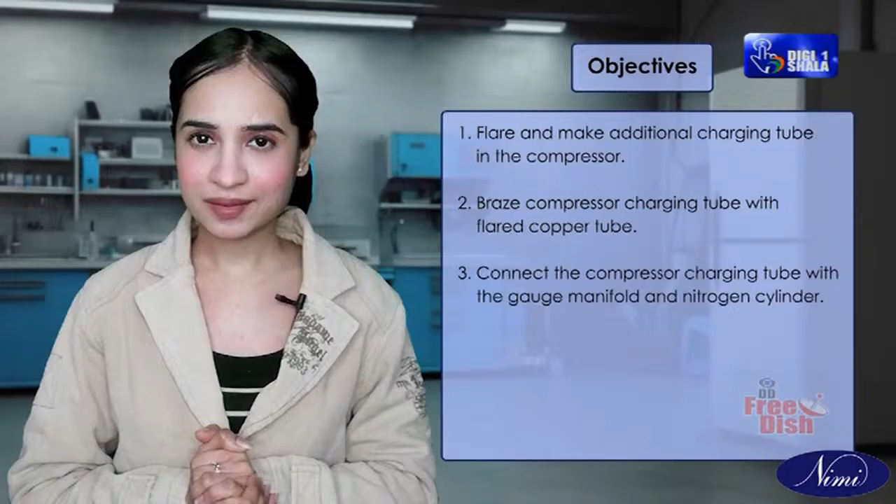Braze compressor charging tube with flared copper tube. Connect the compressor charging tube with the gauge manifold and nitrogen cylinder. Charge dry nitrogen gas into the system. Test the leak with a soap solution. Braze the leak spots. Connect the system with the vacuum pump. Dehydrate the system. Evacuate the system on both high and low sides. Gas charging into the system. Pinch the system.

Let us collect the material and equipment required to do this practical.

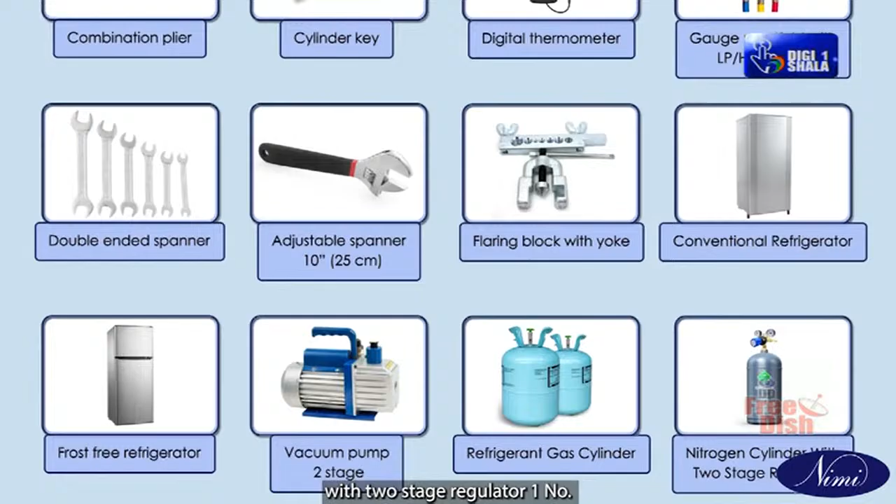Number 1, combination plier, 1 number. Number 2, cylinder key, 1 number. Number 3, digital thermometer, 1 number. Number 4, gauge manifold with LP or HP gauges, 1 set. Double-ended spanner, 1 set. Adjustable spanner, 10 inches, 25 cm, 1 number. Flaring block with yoke, 1 set. Conventional refrigerator, 1 number. Frost free refrigerator, 1 number. Vacuum pump, 2-stage, 1 number. Refrigerant gas cylinder, 1 number. Nitrogen cylinder with 2-stage regulator, 1 number. Soap solution as required.

Procedure, Task 1: Flare and make additional charging tube in compressor conventional refrigerator. Step 1: Make sure that there is no gas in the system. Through the charging tube of compressor, it should be open.

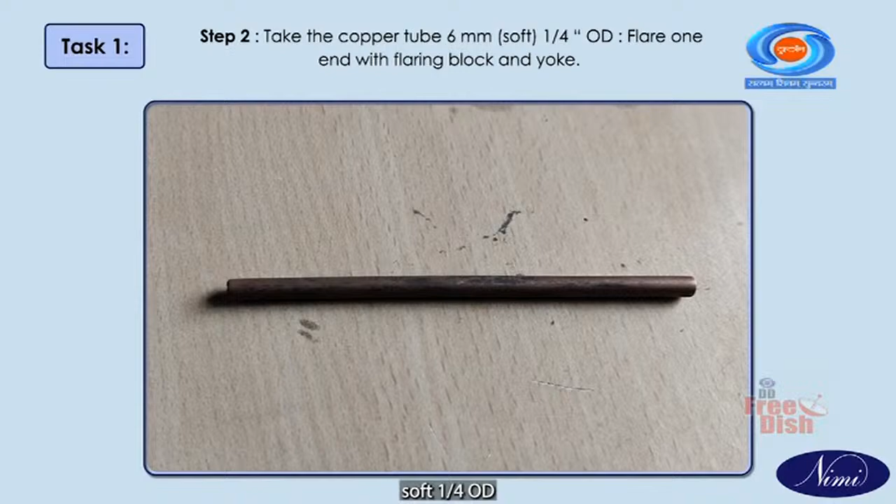Step 2: Take the copper tube 6 mm soft, 1/4 OD. Flare one end with flaring block and yoke. Step 3: Insert the flare nut 6 mm through the copper tube 6 mm at the non-flared end. Step 4: Insert 15 mm of the non-flared end of copper tube 6 mm into the compressor process tube.

Note: this practical exercise is to be done after leak testing of the unit or appliance. Ensure that the unit or appliance is already leak tested.

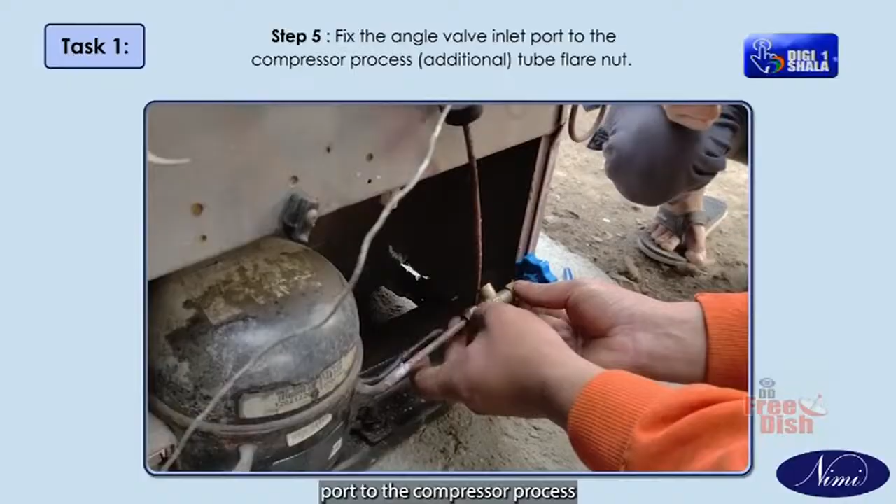Step 5: Fix the angle valve inlet port to the compressor process additional tube flare nut. Step 6: Tighten the joint angle valve flare nut by using a suitable double-ended spanner and adjustable spanner. Step 7: Make sure that the angle valve is closed.

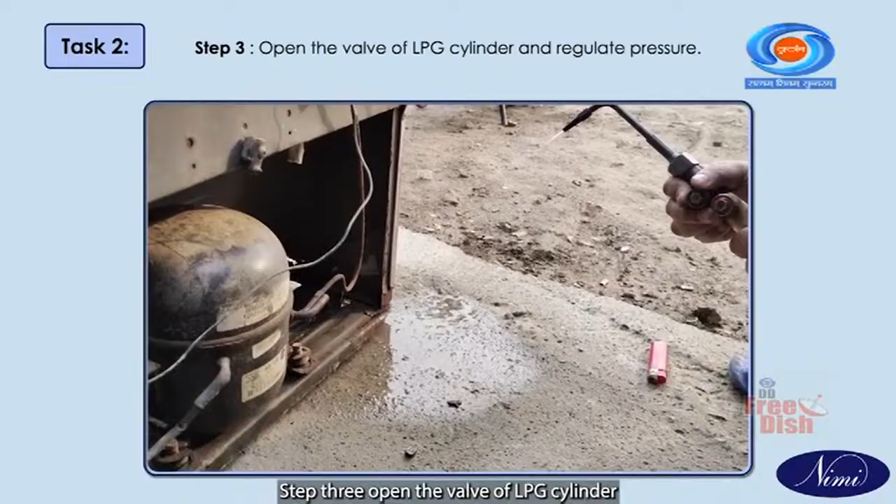Procedure, Task 2: Braze compressor charging tube with additional flared copper tube. Step 1: Take the gas welding brazing set. Step 2: Open the valve of the oxygen cylinder and regulate pressure. Step 3: Open the valve of LPG cylinder and regulate pressure. Step 4: Light up the brazing torch and set the flame to neutral type.

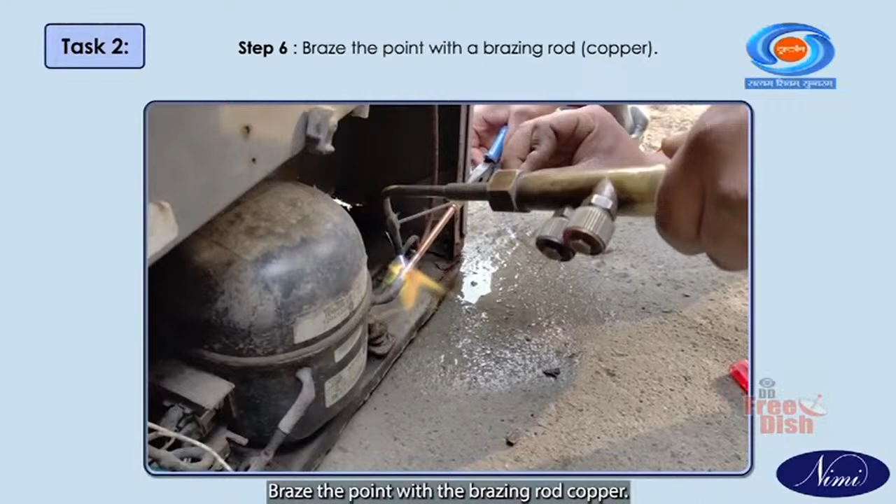Step 5: Take the flame to the point of the compressor charging tube with an additional copper tube 6 mm. Step 6: Braze the point with a brazing rod, copper. Step 7: Allow the point to cool down.

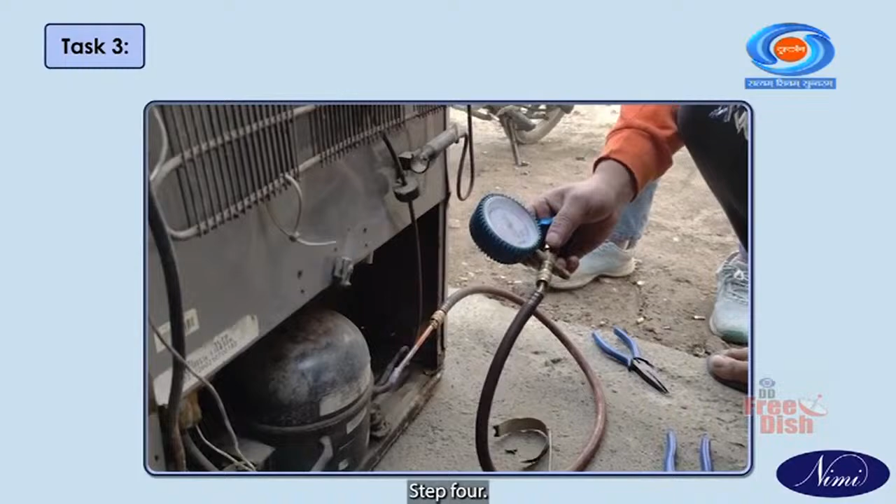Task 3: Connect compressor charging tube with gauge manifold and dry nitrogen gas cylinder. Step 1: Connect flare nut of additional charging tube with flare union 6 mm. Step 2: Connect the other end of flare union with charging hose. Step 3: Connect the other end of charging hose with the HP, high pressure, port of gauge manifold. Step 4: Connect the intermediate port of gauge manifold with another charging hose. Step 5: Connect the other end of charging hose with outlet port of nitrogen cylinder.

Task 4: Charge dry nitrogen gas into the system. Step 1: Make sure that all thread or screw points are in tight fit position. Step 2: If not, make the joints tight by using combination plier to tighten charging hose, and double-ended spanner and adjustable spanner to tighten flare nuts and flare unions.

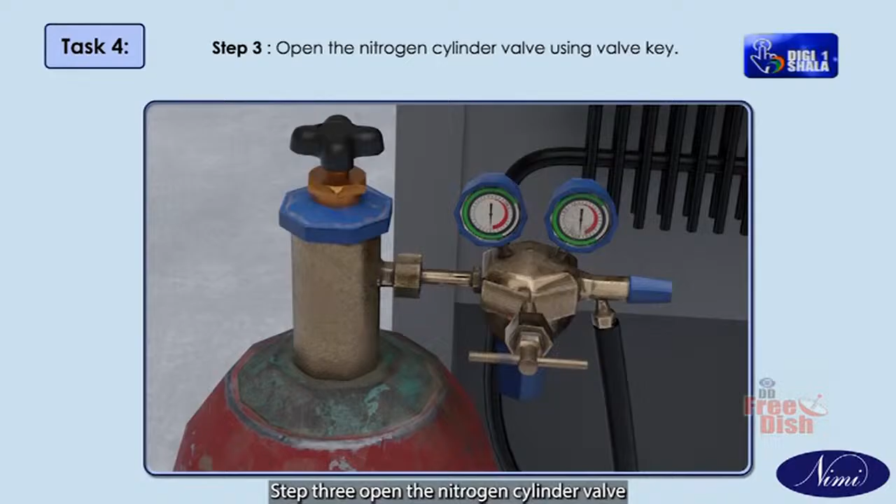Step 3: Open the nitrogen cylinder valve using valve key. Step 4: Regulate the pressure to 50 psi in the pressure regulator. Step 5: Open the knob of the high pressure port of gauge manifold by turning it gently in anti-clockwise direction. Step 6: Observe the nitrogen gas flowing into the system by noticing the reading in the HP gauge of the manifold.

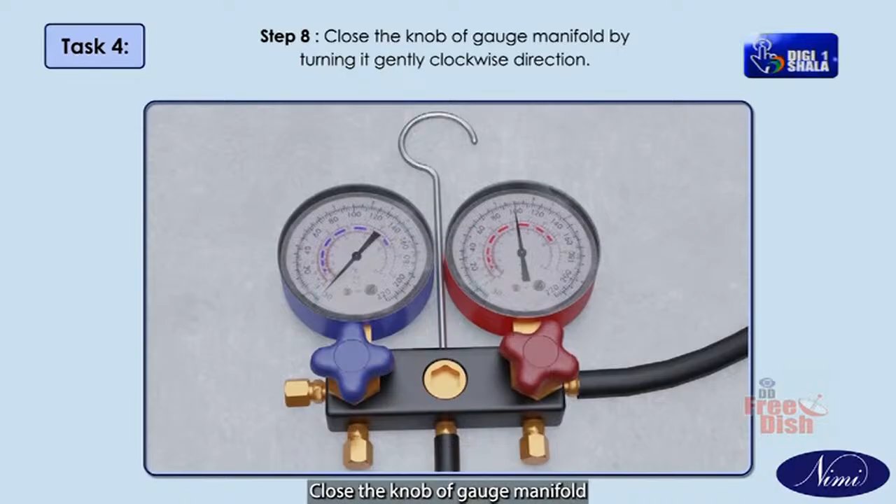Step 7: Allow the nitrogen flow for 15 to 20 seconds. Step 8: Close the knob of gauge manifold by turning it gently in the clockwise direction. Step 9: Observe the reading in the pressure gauge HP manifold.

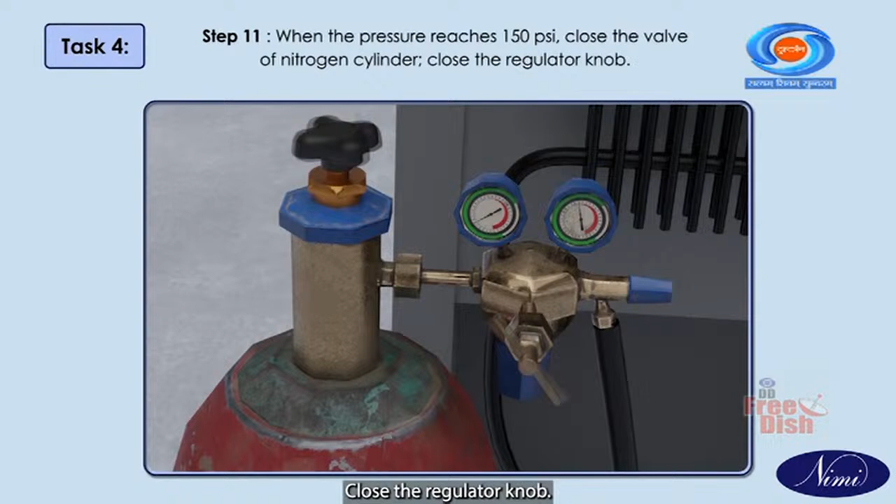Step 10: If the pressure has not reached 150 psig, again allow nitrogen flow into the system by reopening the knob of the manifold. Step 11: When the pressure reaches 150 psi, close the valve of the nitrogen cylinder. Close the regulator knob. Step 12: Close the knob of gauge manifold.

Step 13: Take the dry bulb thermometer and find the temperature of ambient air. Step 14: Note down the time. Step 15: Tabulate the readings in the tabular column which is given at the end of this exercise.

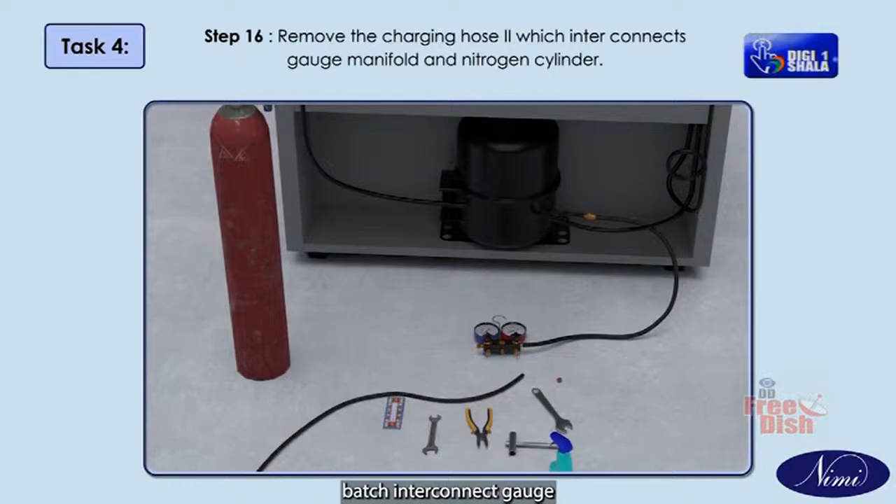Step 16: Remove the charging hose second, which interconnects gauge manifold and nitrogen cylinder. Step 17: Close the intermediate port of manifold by dummy nut brass 6 mm.

Task 5: Test leak with soap solution. Step 1: Take a plastic or metal mug filled with pure water, 500 ml. Step 2: Add 25 ml of soap solution concentrate into the water. Step 3: Stir, mix well and make lather using a paintbrush.

Step 4. If the lather is not sufficient, add some more soap solution into the mixture. Step 5. Soak the sponge into the soap solution mixture. Step 6. Take a small quantity of soap solution mixture with the brush and apply the solution on the points.

Screwed joints, charging hose adapters, flare nuts, etc. Brazed joints are the places where copper tubes are joined together.

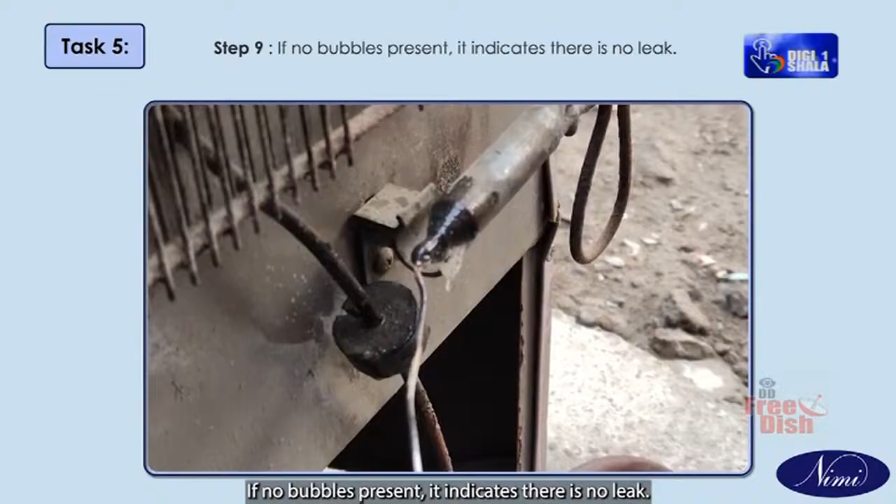Step 7. Take the sponge with solution and lather, and place it under the joints. Step 8. Carefully watch for any nitrogen bubbles coming from the system through the soap solution mixture. Step 9. If no bubbles are present, it indicates there is no leak. Step 10. If any bubbles are present at the joint, add more soap solution on the joint and find exactly where it is coming from.

Step 11. If the leak is at screwed or threaded joints, flare nuts, or charging hose adapters, make it a tight fit and arrest the leak using a double-ended spanner, adjustable spanner, or cutting plier. Step 12. If the leak is at brazed joints or copper tube, confirm the leak and note down the repairs to carry out.

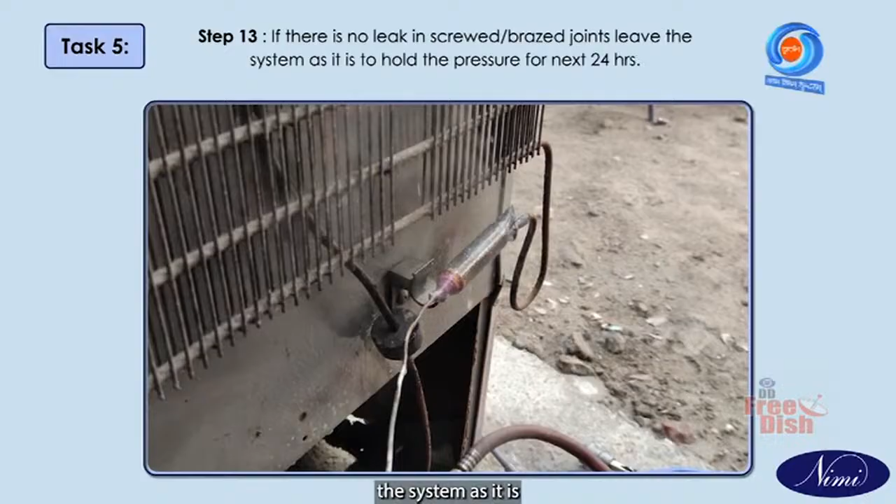Step 13. If there is no leak in the screwed or brazed joints, leave the system as it is to hold the pressure for the next 24 hours. Step 14. After 24 hours, note down the reading: pressure, ambient temperature, and time.

Step 15. Compare the reading of pressure with the previous day's reading. Step 16. If there is no difference between the two readings, or if there is a 5 to 10 psi difference between the two readings, the system has no leak.

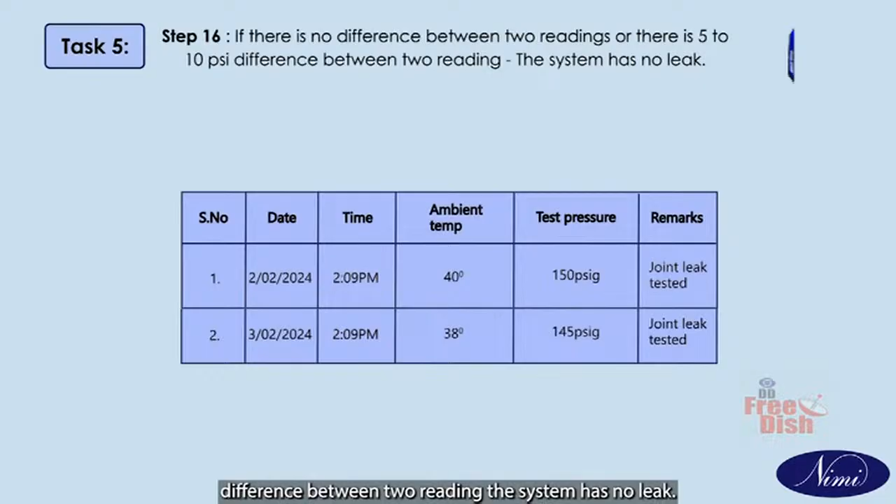Task 6. Braze the leak spots. Step 1. If there are any leaks in brazed joints, mark the spots. Step 2. Let out the nitrogen pressure from the system. Step 3. Clean the leak spots with emery paper.

Step 4. Light the brazing torch and use goggles. Step 5. Heat the top and bottom joints of the leakage pipes. When it gets red hot, apply flux and apply the copper rod.

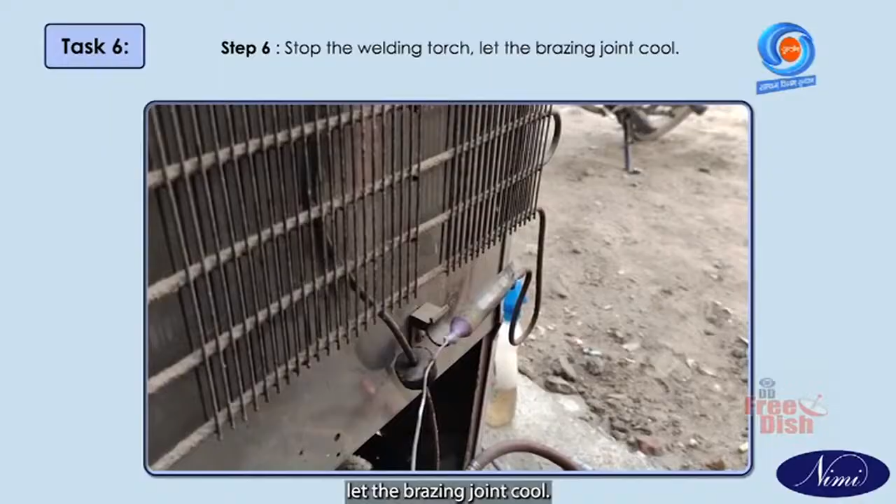Step 6. Stop the welding torch and let the brazing joint cool. Step 7. Pressurize the system with dry nitrogen. Step 8. Check for leaks with soap water on all brazed joints. Step 9. If there is no leak, vent the nitrogen pressure.

Task 7. Connect the system with the vacuum pump. Step 1. Connect one end of charging hose 1 to the outlet of the angle valve, and tighten the joint with a cutting plier. Step 2. Connect the other end of the charging hose to the LP (low pressure) port of the gauge manifold.

Step 3. Connect one end of charging hose 2 to the intermediate port of the gauge manifold. Step 4. Connect the other end of charging hose 2 to the inlet port of the vacuum pump. Step 5. Close the HP (high pressure) port of the gauge manifold with a brass flare dummy nut, 6 mm.

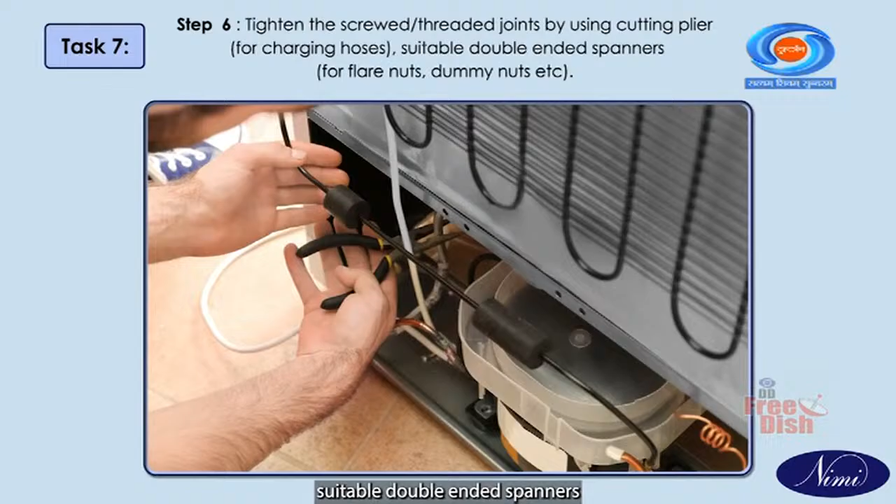Step 6. Tighten the screwed or threaded joints using a cutting plier for charging hoses and suitable double-ended spanners for flare nuts, dummy nuts, etc. Step 7. Make sure that the HP and LP knobs of the gauge manifold are closed.

Recap. In this video, so far we have discussed: number 1, flare and make additional charging tubes in the compressor; number 2, braze compressor charging tubes; number 3, connect the compressor charging tube with the gauge manifold and nitrogen cylinder; number 4, charge nitrogen gas into the system.

Number 5, test the leak with a soap solution. Number 6, braze the leak spots. Number 7, connect the system with a vacuum pump.

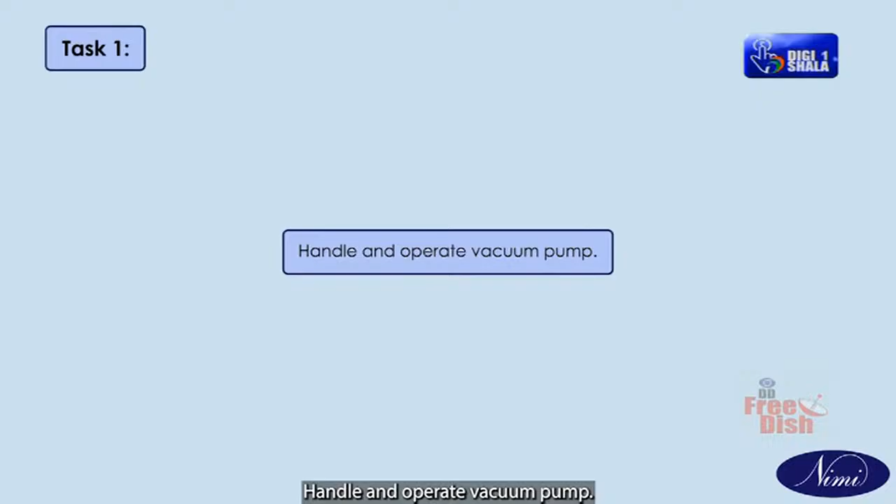Task 1. Handle and operate the vacuum pump. Step 1. Ensure that electrical power supply is available to the vacuum pump by using a line tester. Step 2. Connect the electrical power line of the vacuum pump to the power source, test board, or switchboard. Step 3. Switch on the vacuum pump.

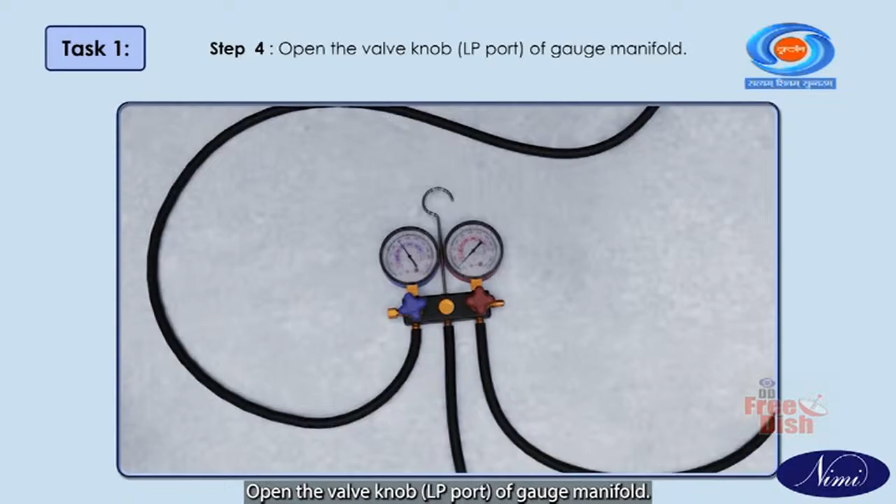Step 4. Open the valve knob, LP port of the gauge manifold. Step 5. Open the angle valve by turning its stem in an anti-clockwise direction with a ratchet key or wrench.

Step 6. Observe the pressure reading available on the LP gauge of manifold. The pressure keeps reducing. Step 7. Leave the system as it is for 2 hours without any interruption.

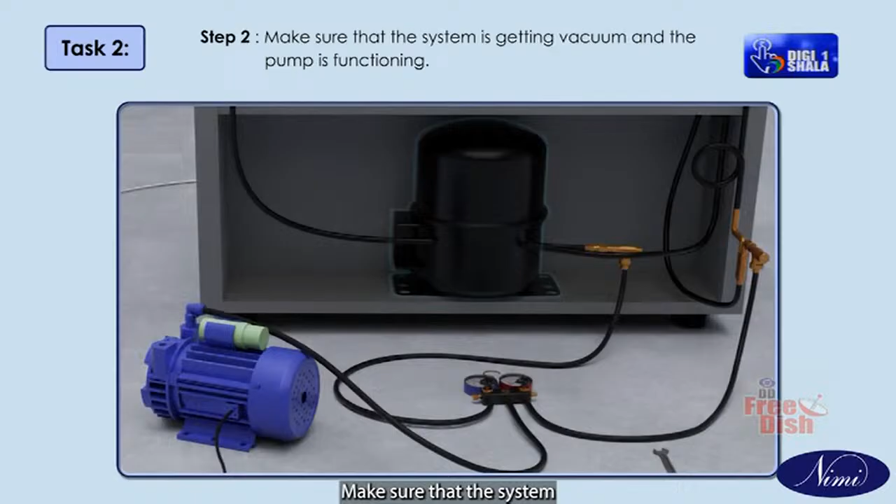Task 2. Dehydrate the system. Step 1. Take the heating kit infrared lamp and switch it on. Step 2. Make sure that the system is getting vacuum and the pump is functioning.

Step 3. Heat all over areas of the system with infrared lamp. Step 4. Apply heat uniformly to all areas: refrigerant tubes, condenser coil, evaporator coil if it is exposed, liquid line dryer or filter.

Step 5. Keep and maintain the distance between the heating kit and surface of the system at 15 cm always. Step 6. Continue the process for 15 to 30 minutes.

Task 10. Evacuate the system. Step 1. Notice and observe the pressure reading on the LP gauge of the manifold. It should be 100 microns or below, equivalent to 30 inches of Hg.

Step 2. Close the angle valve by turning its stem clockwise with a ratchet key or wrench after 3 hours from the time the vacuum pump started.

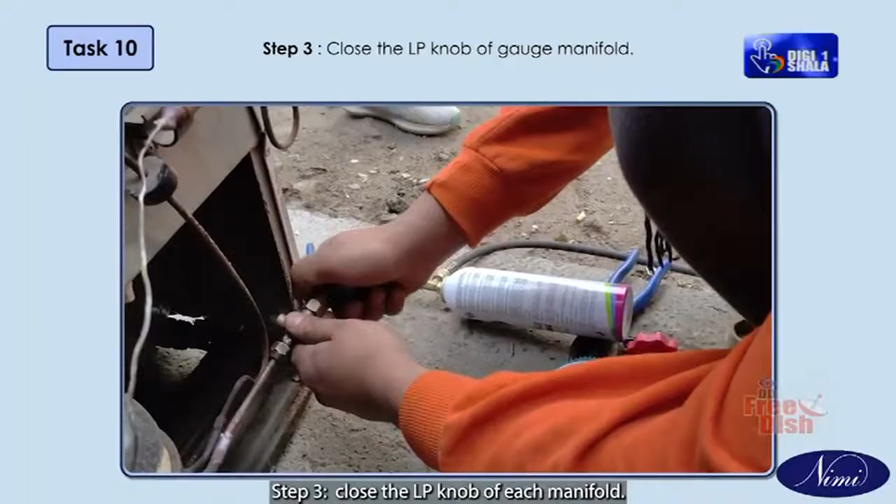Step 3. Close the LP knob of the gauge manifold. Step 4. Switch off the vacuum pump and disconnect the power supply. Step 5. Disconnect charging hose 1 from the angle valve.

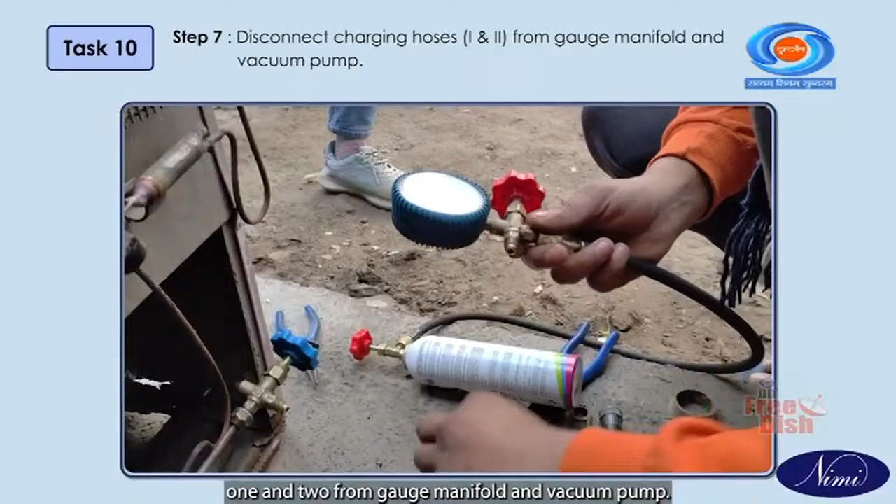Step 6. Close the outlet of the angle valve with a dummy nut 6 mm, and tighten the nut with a suitable size double-ended spanner. Step 7. Disconnect charging hoses 1 and 2 from the gauge manifold and vacuum pump.

Task 11. Gas charging the system. Step 1. Charge refrigerant in the hermetic refrigeration system of a conventional refrigerator. Step 2. Charge refrigerant in the hermetic refrigeration system of a frost-free refrigerator. Step 3. It is assumed that the unit or appliance which is going to get charged is under or holding vacuum. Task 12. Connect the system to the charging cylinder.

Step 1. Connect one end of charging hose 1 to the valve of the charging cylinder and connect the other end to the intermediate port of the gauge manifold.

Step 2. Connect one end of charging hose 2 to the angle valve of the compressor and connect the other end to the low pressure (LP) port of the gauge manifold. Step 3. Close the high pressure (HP) port of the gauge manifold with a flare dummy nut 6 mm and tighten it using a suitable double-ended spanner.

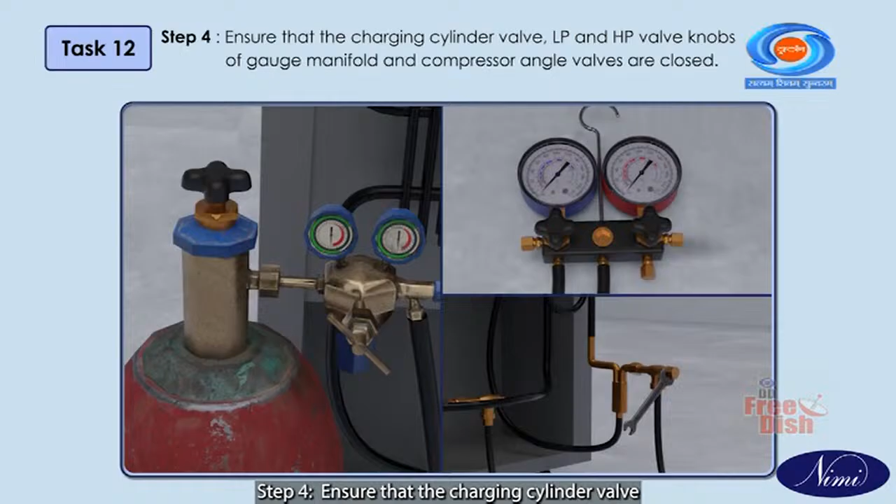Step 4. Ensure that the charging cylinder valve, LP and HP valve knobs of the gauge manifold, and compressor angle valves are closed. Step 5. Tighten the ends of charging hoses using a cutting plier.

Task 13. Purge air in the charging hoses. Step 1. Open the charging cylinder valve gently or slowly by turning the knob half a turn in the anti-clockwise direction. Step 2. Purge charging hose 1 by loosening its end at the intermediate port of the gauge manifold using a cutting plier.

Step 3. Observe the refrigerant escaping at the intermediate port of the manifold in the form of snow. Then immediately tighten the end of the charging hose to ensure the escape or release of refrigerant is arrested.

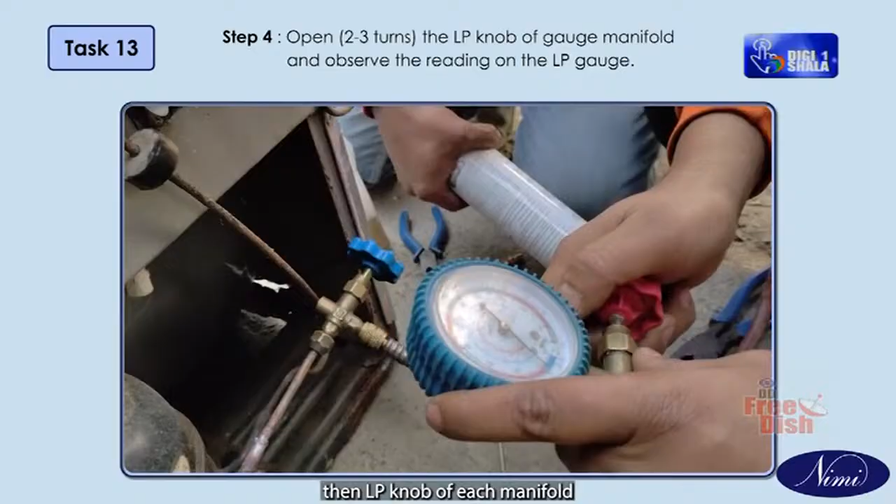Step 4. Open the LP knob of the gauge manifold 2 to 3 turns and observe the reading on the LP gauge. Step 5. Purge charging hose 2 by loosening its end at the angle valve using a cutting plier. Step 6. Observe the refrigerant escape, then immediately tighten the end of charging hose 2 to arrest the refrigerant flowing out.

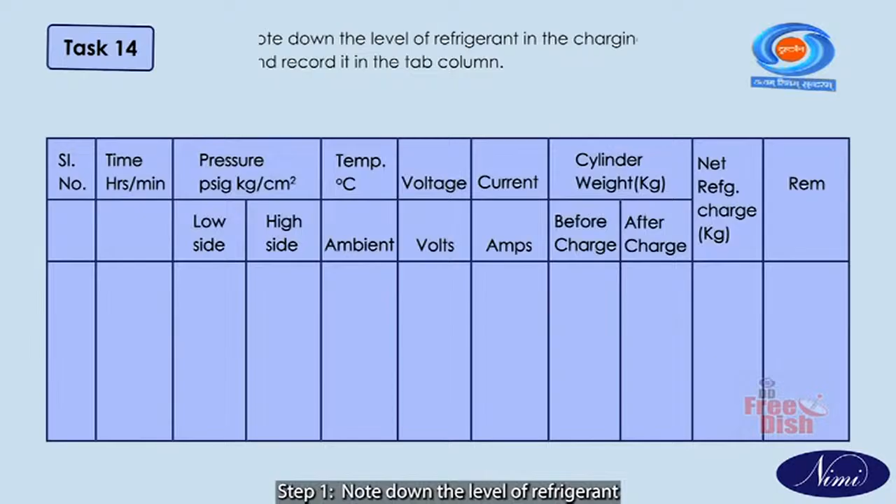Task 14. Charge refrigerant into the system. Step 1. Note down the level of refrigerant in the charging cylinder and record it in the tab column.

Step 2. Open the stem of the angle valve at the compressor process line by slowly turning it anti-clockwise using a ratchet key or wrench.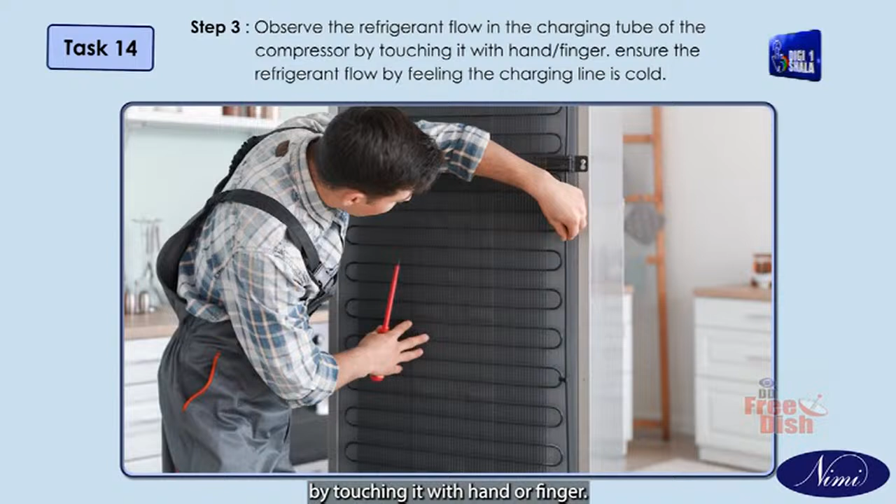Step 3. Observe the refrigerant flow in the charging tube of the compressor by touching it with your hand or finger. Ensure the refrigerant flow by feeling that the charging line is cold.

Step 4. Observe the refrigerant flow or transfer by watching the level in the charging cylinder. Step 5. Leave the system as it is for 3 to 5 minutes, or until all refrigerant or the required quantity of refrigerant settles into the system.

Step 6. Close the valve of the charging cylinder after ensuring the refrigerant is transferred into the system. Step 7. Close the LP knob of the gauge manifold by turning the knob clockwise using your hand.

Step 8. Close the angle valve by carefully turning its stem clockwise using a ratchet key and adjustable spanner. Step 9. Observe and record the reading on the charging cylinder to calculate the amount of refrigerant charged. Step 10. Disconnect charging hose 2 from the angle valve.

Task 15. Connect the system to the service cylinder. Gas charging in refrigeration systems can be done using various methods, including the weight method, pressure method, and temperature method.

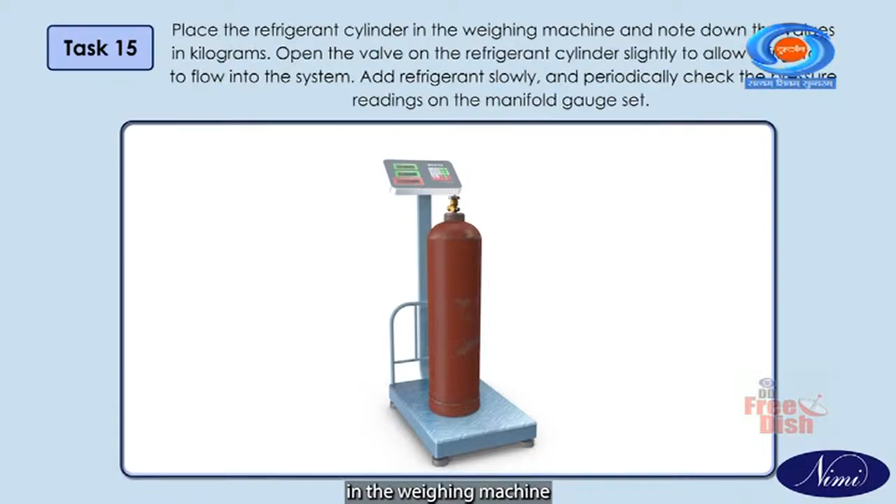Place the refrigerant cylinder on the weighing machine and note down the values in kilograms. Open the valve on the refrigerant cylinder slightly to allow refrigerant to flow into the system.

Add refrigerant slowly and periodically check the pressure readings on the manifold gauge set.

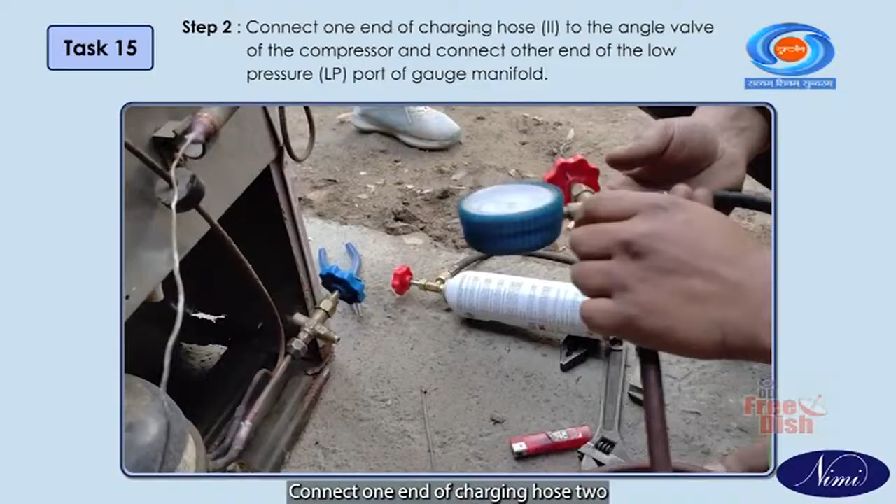Step 1. Connect one end of charging hose 1 to the valve of the service cylinder and connect the other end to the intermediate port of the gauge manifold. Step 2. Connect one end of charging hose 2 to the angle valve of the compressor and connect the other end to the low pressure LP port of the gauge manifold. Step 3. Close the high pressure HP port of the gauge manifold with a flare dummy nut 6 mm and tighten it using a suitable double-ended spanner.

Task 16. Purge air in the charging hoses. Step 1. Open the service cylinder valve by slowly turning its stem half to one turn in the anti-clockwise direction using a ratchet key or wrench.

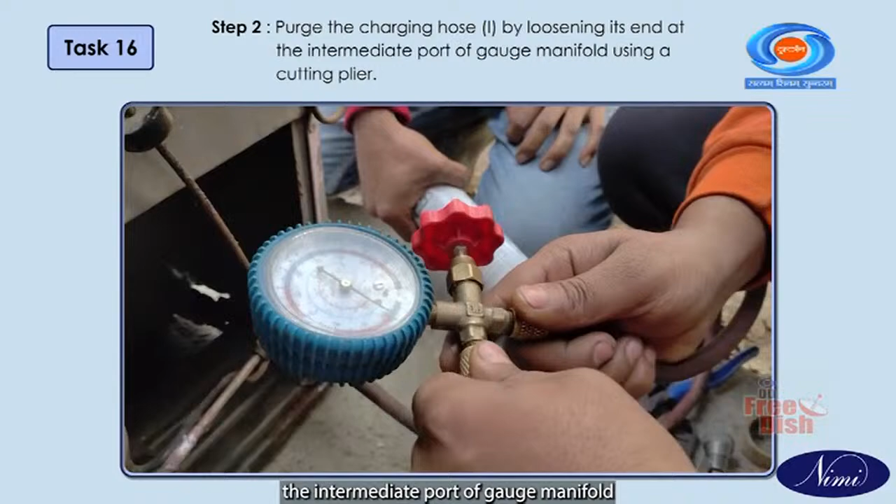Step 2. Purge the charging hose 1 by loosening its end at the intermediate port of the gauge manifold using a cutting plier. Step 3. Observe the refrigerant escaping at the intermediate port of the manifold in the form of snow. Then immediately tighten the end of charging hose 1 to ensure the release of refrigerant is averted. Step 4. Open the LP knob of the gauge manifold 2 to 3 turns and observe the reading on the LP gauge.

Step 5. Purge charging hose 2 by loosening its end at the angle valve using a cutting plier. Step 6. Observe the refrigerant escape, then immediately tighten the end of charging hose 2 to arrest the refrigerant flowing out.

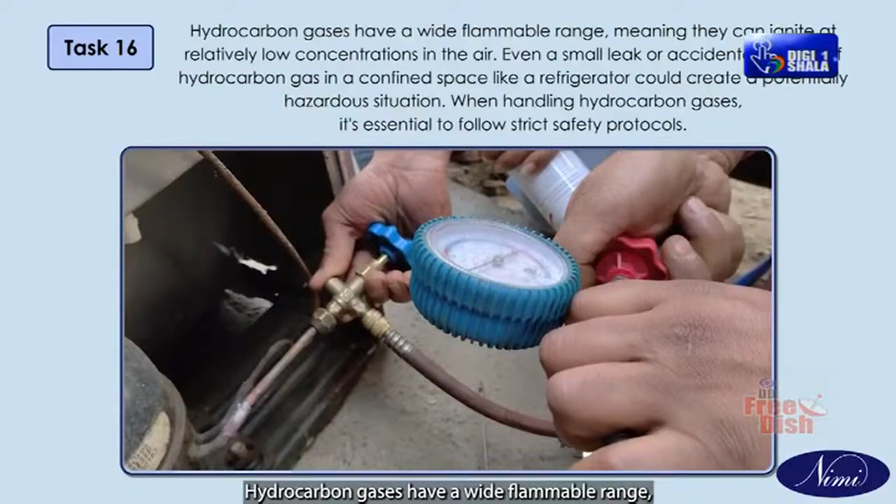Hydrocarbon gases have a wide flammable range, meaning they can ignite at relatively low concentrations in the air. Even a small leak or accidental release of hydrocarbon gas in a confined space like a refrigerator could create a potentially hazardous situation. When handling hydrocarbon gases, it's essential to follow strict safety protocols.

Task 17. Charge refrigerant into the system. Step 1. Open the angle valve stem at the compressor process line by slowly turning it in the anti-clockwise direction using a ratchet key or valve key.

Step 2. Observe the refrigerant flow in the charging tube of the compressor by touching it with hand or finger. Ensure the refrigerant is flowing by feeling the charging line is cold. Step 3. Observe the refrigerant flow also in the LP gauge of the manifold, with the pressure increasing from vacuum level -30 inHg to above 0 psig onwards.

Step 4. Observe the hissing noise into the compressor as the pressure increases from vacuum to above 0 level; this indicates the vacuum is broken. Step 5. Allow the refrigerant to flow till it reaches 30 to 50 psig in the LP gauge of the manifold, then immediately close the angle valve.

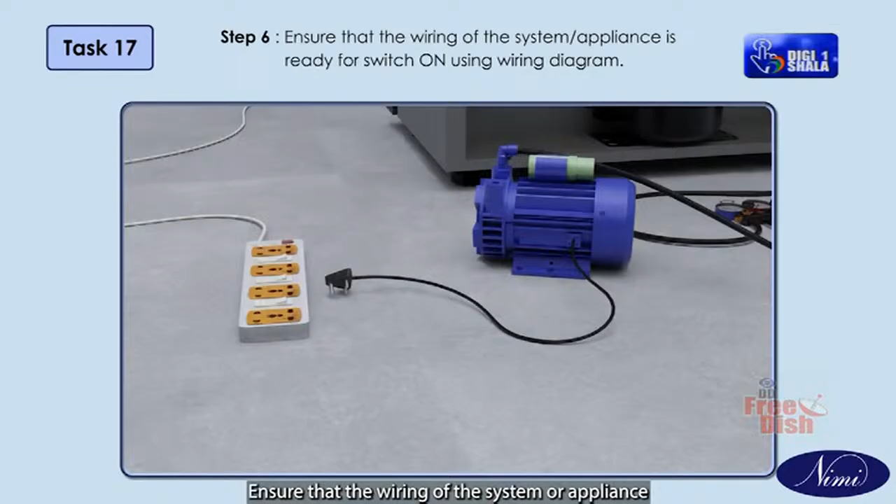Step 6. Ensure that the wiring of the system or appliance is ready for switch on using the wiring diagram. Step 7. Test the electrical power supply available to the appliance is within operating limits of 180 to 230 volts, amperes, watts, using a clamp meter or tong tester.

Task 18. Pinch the system tube. Step 1. Pinching may be required on either the low side or high side, and sometimes at both sides, the suction or process line and the liquid line. Step 2. The system should be in working condition when pinching at the low side, and kept in the off position when pinching at the high side.

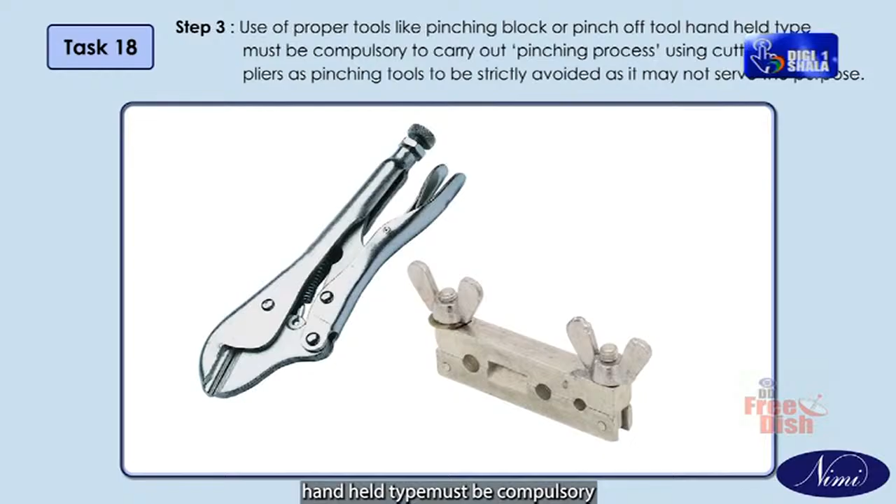Step 3. Use of proper tools like a pinching block or handheld pinch-off tool must be compulsory to carry out the pinching process; using cutting or nose pliers as pinching tools should be strictly avoided as it may not serve the purpose. Step 4. Wear eye goggles and hand gloves whenever necessary.

Step 5. Ensure that the compressor is working. Step 6. Pinch the line between the compressor process tube and the flare nut of the angle valve using a pinching tool. Step 7. Hold the pinching tool tightly on the process line.

Step 8. Remove the angle valve by loosening it from the flare nut using an adjustable spanner and a suitable size double-ended spanner. Step 9. Cut the copper tube between the flare nut and the pinching point using a tube cutter.

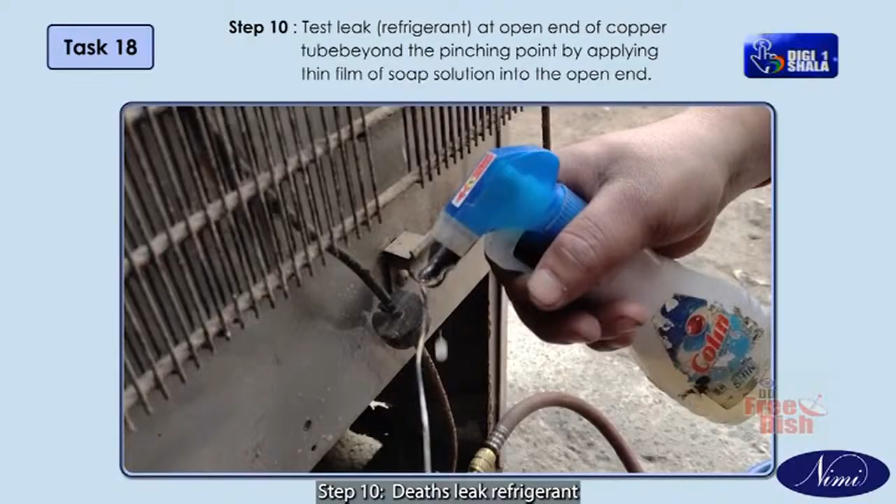Step 10. Test for leaking refrigerant at the open end of the copper tube beyond the pinching point by applying a thin film of soap solution to the open end. Step 11. Arrest the leak, if found, by extra tightening of the pinching block or double crimping the handheld pinching tool.

Once charging is completed, monitoring temperature, current, voltage, and pressure helps ensure that the refrigerator's cooling system is operating within its designed parameters.

Hi everyone! In today's video, let us know how to make a wiring circuit for a refrigerator. Objectives: at the end of this video, you will be able to trace the electrical wiring circuit in the refrigerator system.

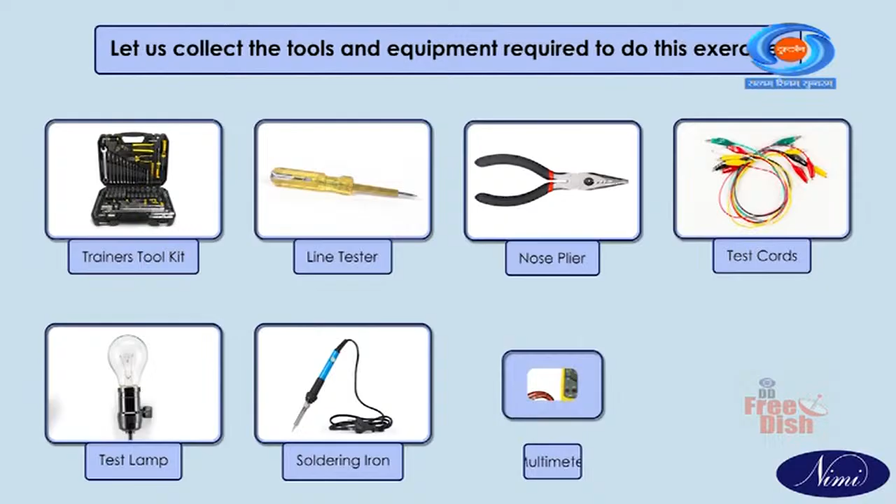Let us collect the tools and equipment required to do this exercise: Trainee's toolkit 1 set, line tester 1 number, nose plier 1 number, test cords 5 meters, test lamp 1 number, soldering iron 1 number, multimeter 1 number, clamp meter 1 number, fin straightener 1 number, sandpaper as required, and a complete system of RSIR circuit, CSIR circuit 1 number.

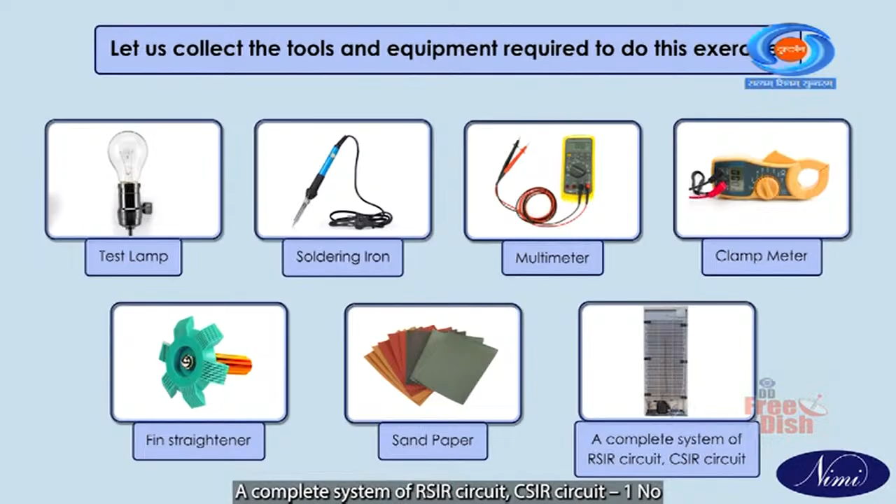Task 1: Check electrical wiring RSIR operation. Step 1: As per the circuit, check that the bulb with the switch is connected parallel to the power supply. The purpose of this switch is to detect when the refrigerator door is opened or closed.

Step 2: Check that the protector is connected with the phase terminals of the power supply in series to the compressor along with the relay. The overload protector is connected in series with the compressor. It is part of the electrical circuit that provides power to the compressor motor. These devices are designed to protect the compressor, which is a critical component in the refrigeration system. The overload protector may have a manual reset button. If the protector trips, the manual reset button needs to be pressed to restore power to the compressor.

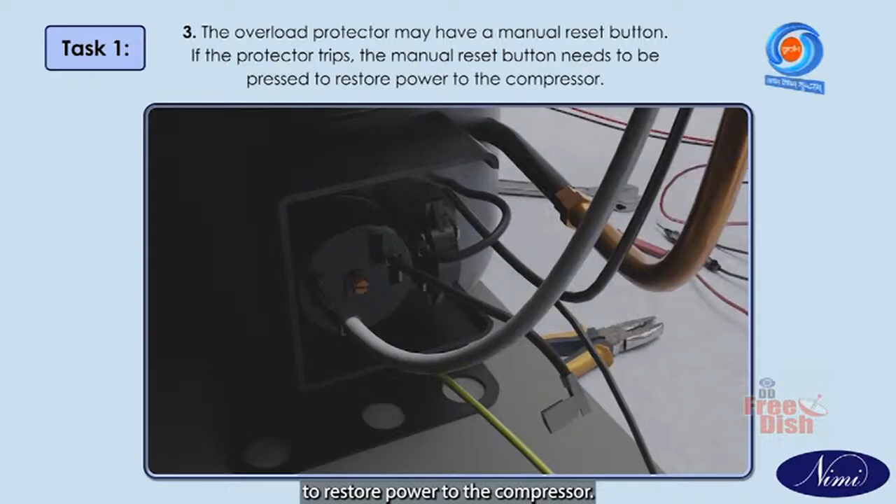Step 3: Check that the overload protector is connected to the current relay contacts as per the circuit diagram. In a refrigerator system, the overload protector and the current relay work together to protect the compressor and ensure efficient operation. The current relay is another device connected in series with the compressor. It is responsible for controlling the starting and running of the compressor motor.

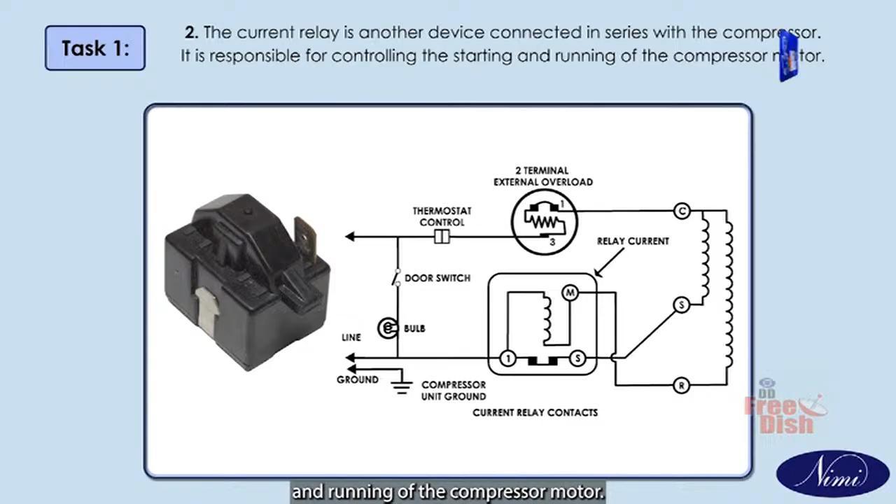The compressor motor has two windings, a start winding and a run winding. The current relay is involved in switching between these windings during the starting and running phases of the compressor. When the refrigerator is turned on, the current relay plays a role in the starting sequence of the compressor. It helps energize the start winding to initiate the compressor's rotation. Once the compressor is up and running, the current relay may switch to the run winding for continued operation.

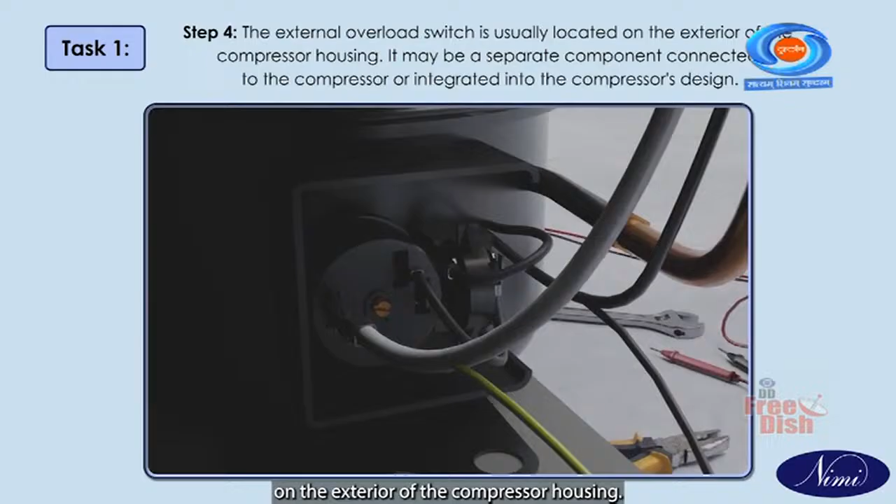Step 4: The external overload switch is usually located on the exterior of the compressor housing. It may be a separate component connected to the compressor or integrated into the compressor's design. It interrupts the flow of electrical current to the compressor when it senses that the temperature or current draw is reaching unsafe levels.

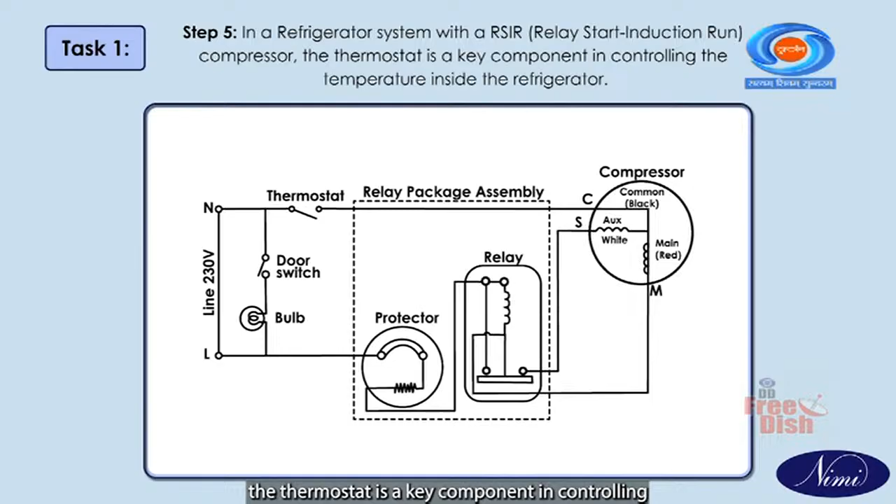Step 5: In a refrigerator system with RSIR, relay start induction run compressor, the thermostat is a key component in controlling the temperature inside the refrigerator. The thermostat connected to the compressor contains a temperature sensing element, such as bimetallic or a gas-filled bulb, or volatile liquid filled. This element responds to changes in temperature inside the refrigerator.

In a refrigeration system, the thermostat is used to control the internal temperature by regulating the operation of the cooling system. When the temperature sensed by the thermostat deviates from the set point temperature, the thermostat sends a control signal to the cooling system and cuts off the compressor.

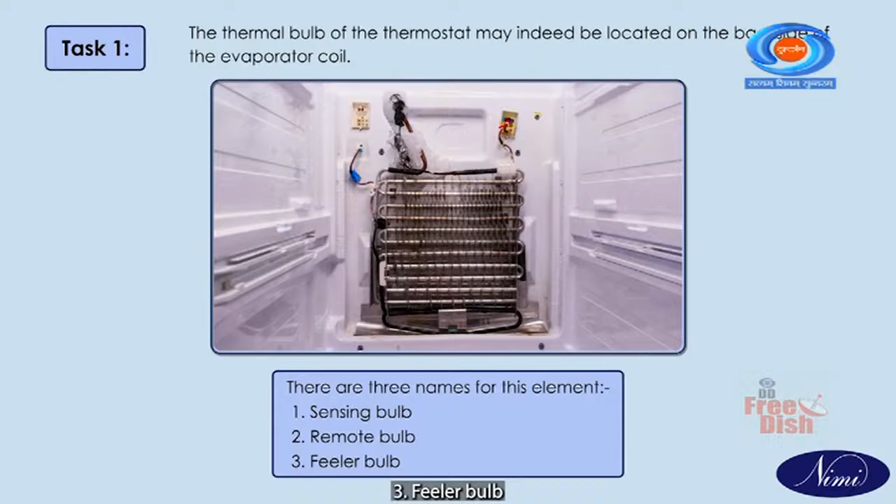The thermal bulb of the thermostat may indeed be located on the back side of the evaporator coil. There are three names for this element: number 1, sensing bulb; number 2, remote bulb; number 3, feeler bulb. The thermal bulb is a small sealed chamber attached to the thermostat, usually located within the refrigerated space or in close proximity to it. Inside the thermal bulb is a volatile liquid, such as refrigerant or a similar substance with high thermal sensitivity.

Check the electrical wiring CSIR operation. Step 1: In the CSIR, capacitor start induction run motor refrigeration system, a door bulb with a control switch is connected in parallel to the power supply.

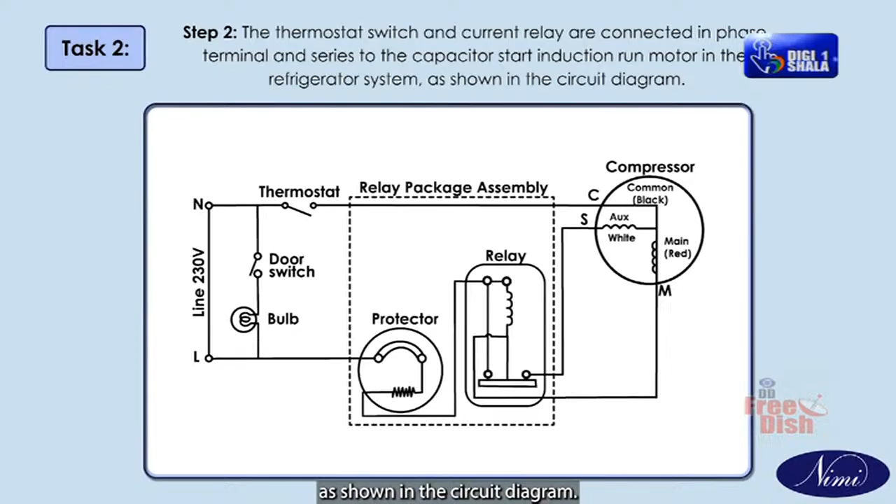Step 2: The thermostat switch and current relay are connected in phase terminal and series to the capacitor start induction run motor in the refrigeration system as shown in the circuit diagram. Step 3: In CSIR, identify the starting and running winding of the motor by measuring the resistance values using a multimeter.

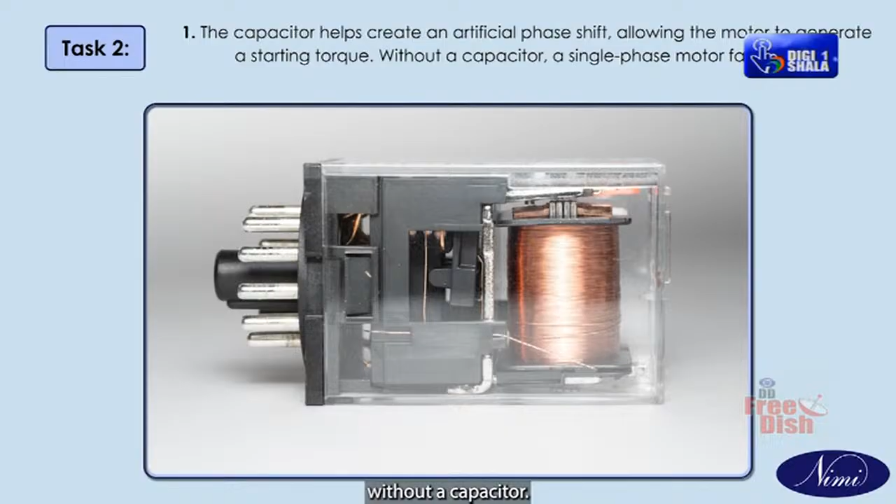Step 4: Ensure that the starting capacitor is connected in series with the starting or auxiliary winding. The capacitor helps create an artificial phase shift, allowing the motor to generate a starting torque. Without a capacitor, a single-phase motor fails to start. A capacitor is often used to improve the motor's starting and running characteristics.

Step 5: Check that the common point C in the motor terminal is connected to the overload protector in series. Recap: In this video session, we have learned how to trace the electrical wiring circuit in the refrigerator system.

Hi everyone. In today's video, let us know how to install a refrigerator.

Objectives: at the end of this video, you will be able to: 1. Uncrate or unpack the refrigerator unit. 2. Select the location of the unit. 3. Position the unit. 4. Test the electrical power supply. 5. Connect the voltage stabilizer to the unit. 6. Start the refrigerator unit. 7. Test the performance of the unit.

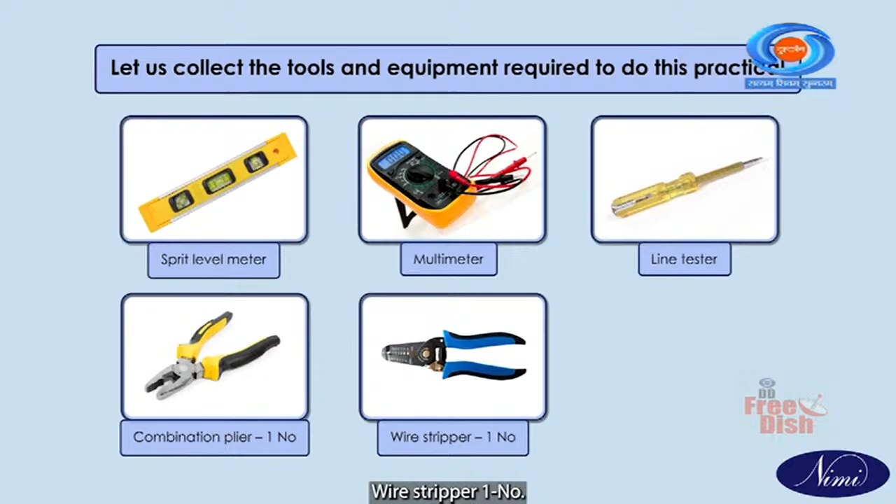Let us collect the tools and equipment required for this practical: spirit level meter, multimeter, line tester, combination plier, wire stripper, screwdriver 150 mm, adjustable spanner 150 mm, thermometer stem or digital type -5 to +50 degrees Celsius, clamp meter 0 to 10 amperes, domestic refrigerator, and voltage stabilizer, 1 number each.

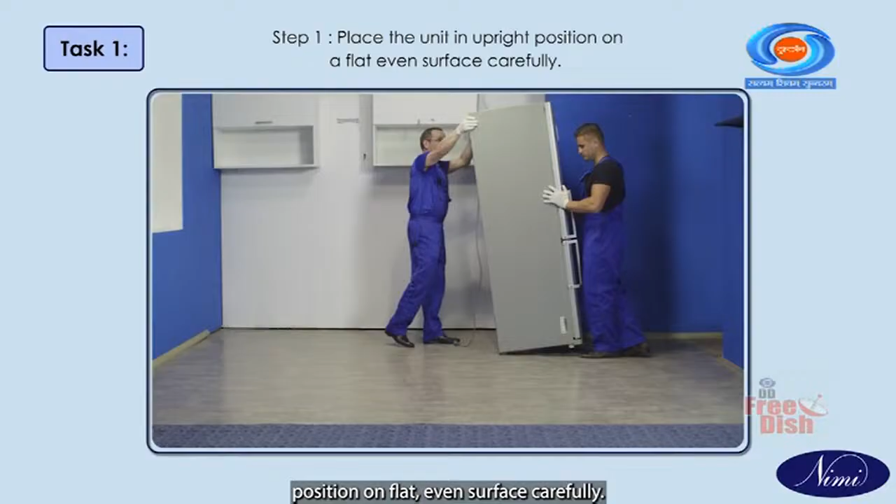Procedure. Task 1: Uncrate or unpack the refrigerator unit. Step 1: Place the unit in upright position on a flat, even surface carefully. Step 2: Cut the packing tape or rope using wire stripper or small knife. Step 3: Remove the outer cover or crate by lifting it from bottom to top very carefully. Caution: beware of condenser coil if it is on the backside. If any damage occurs on it, it may lead to gas leak.

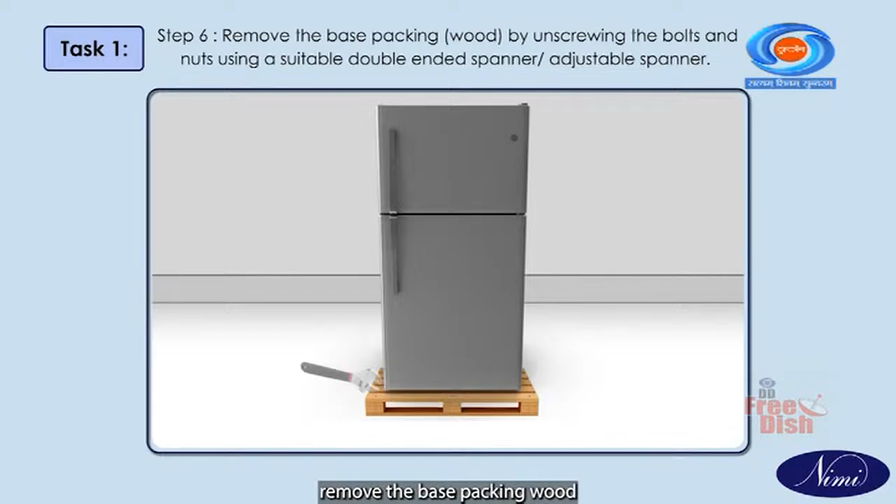Step 4: Remove extra packing materials if there are any. Step 5: Watch carefully the outer surface of the unit. The outer body should be clean and glossy, without any scratches, dents, etc. Step 6: Remove the base packing wood by unscrewing the bolts and nuts using a suitable double-ended spanner or adjustable spanner. Note: keep the unit safe in inclined position while removing the base bolts. Step 7: Keep the unit away from packing materials.

Task 2: Select the location. Note: normally, the unit location will be decided before the unit arrives, so that proper wiring and plug point will be made accordingly. Step 1: Ensure that the location has sufficient air ventilation. Step 2: Ensure that electrical power point is available near the unit. Step 3: Ensure that there is no heat emitting or radiating units, gas stoves, heaters, sunlight, etc. nearby the location. Step 4: Ensure that the floor level should be strong and flat, even surface, using spirit level.

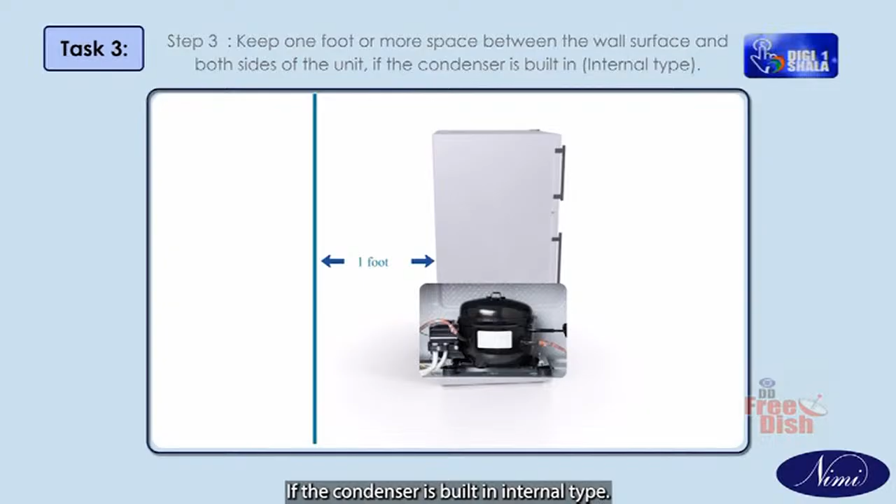Task 3: Position the refrigerator unit. Step 1: Place the unit on the selected location. Step 2: Keep 1 foot or more space between the wall surface and rear side of the unit if condenser is on the backside, external type. Step 3: Keep 1 foot or more space between the wall surface and both sides of the unit if the condenser is built in, internal type. Step 4: Keep sufficient space in front for opening the door fully.

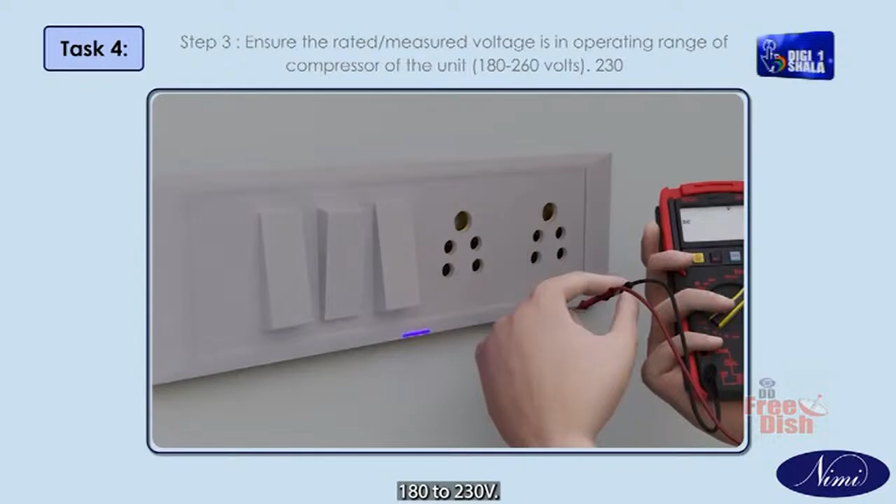Task 4: Test the electrical power supply. Step 1: Test the availability of electrical power using a line tester by inserting its tip into the socket. Step 2: Measure the voltage rate using a multimeter, tong tester, or voltmeter by inserting the probes, phase and neutral, into the socket. Step 3: Ensure the rated or measured voltage is within the operating range of the compressor, 180 to 260 volts. Step 4: Use a voltage stabilizer if the voltage is out of range or fluctuating. Step 5: Ensure proper earthing is made in the socket.

Task 5: Connect voltage stabilizer. Note: it is always advisable to use a voltage stabilizer of correct capacity, not only in places of low or fluctuating voltage, but everywhere with every unit, to save the compressor from sudden voltage fluctuations and maintain constant voltage to the compressor. Step 1: Unpack the voltage stabilizer. Step 2: Notice the outer surface of the stabilizer for any defects like sheet metal bulge, scratches, etc. Step 3: Make sure the pointer of the voltmeter of the stabilizer is at 0 reading only, or that the voltmeter has no error.

Step 4: Insert the 3-pin plug of the stabilizer into the socket. Step 5: Switch on the socket. Step 6: Ensure the LED bulb for main on is glowing, if provided. Step 7: Observe the voltage limits of input and output by pressing the selector switch. Note: normally, voltage stabilizers for refrigerators or air conditioners are available with time delay, 3 minutes start, so the output voltage may come after 3 minutes from the time it is switched on.

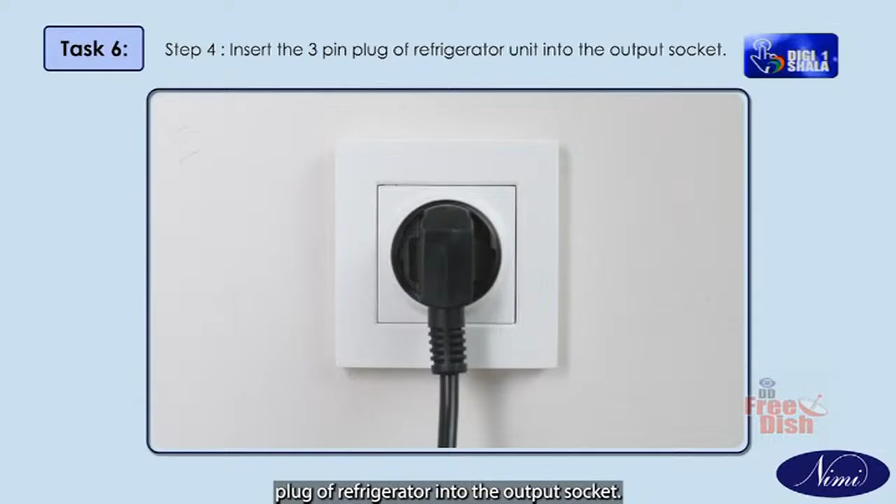Step 4: Insert the 3-pin plug of the refrigerator into the output socket. Step 5: Switch on the stabilizer. Step 6: Wait for 3 minutes to start the unit if the stabilizer has time delay facility. Step 7: Observe the refrigerator gets on by hearing a mild noise, 30 to 35 decibel, due to the compressor starting. Task 7: Test the performance of the unit.

Step 1. Ensure that the doors of the unit are closing well. Step 2. Make shelves in the cabinet with the materials given separately, along the inside of the unit. Step 3. Fill water at normal room temperature in the ice tray in the freezer section.

Step 4. Observe the bulb or light in the cabinet glows during the door kept open. Step 5. Set the thermostat knob to normal position between low cool and high cool position by turning it clockwise or anti-clockwise direction as required.

Step 6. For conventional ordinary refrigerators, feel the chillness by keeping the hands over the inner surface of the freezer. For frost-free refrigerators, feel the chillness by keeping the hands before the air breeze at the fan motor which is in the freezer. Step 7. Put the sensing probe of the digital thermometer inside the freezer and start watching the reading in the display outside.

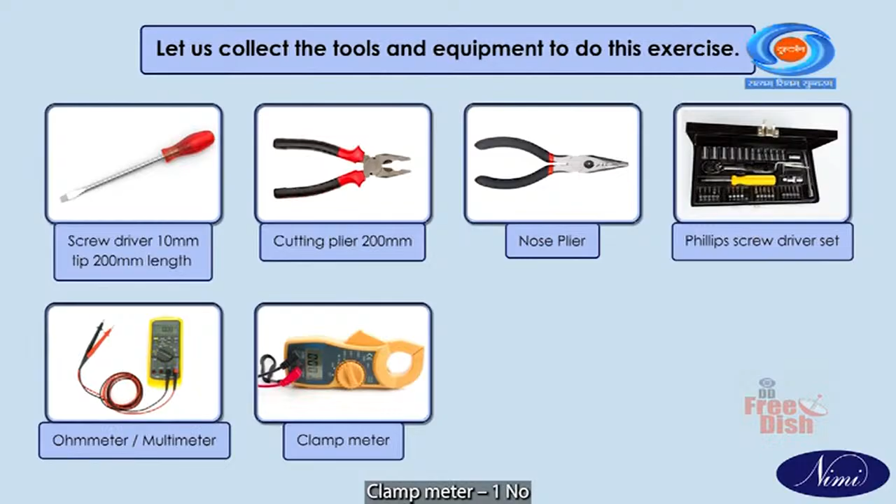Clamp meter, 1 number. OLP overload protector, 1 number. FHP fractional horsepower compressor, 1 number. Test board fitted with voltmeter and ammeter, 1 number. Capacitor, 1 number. Sandpaper as required. Insulation tape, 1 number. Procedure: Task 1. Test the current coil relay.

Test the current coil relay. Step 1. Check continuity between the 4th and 5th with the help of ohm meter or multimeter. Step 2. If the continuity is OK between 4 and 5, coil continuity of current coil relay is OK. Normal condition, 4 and 5 continuity will be there.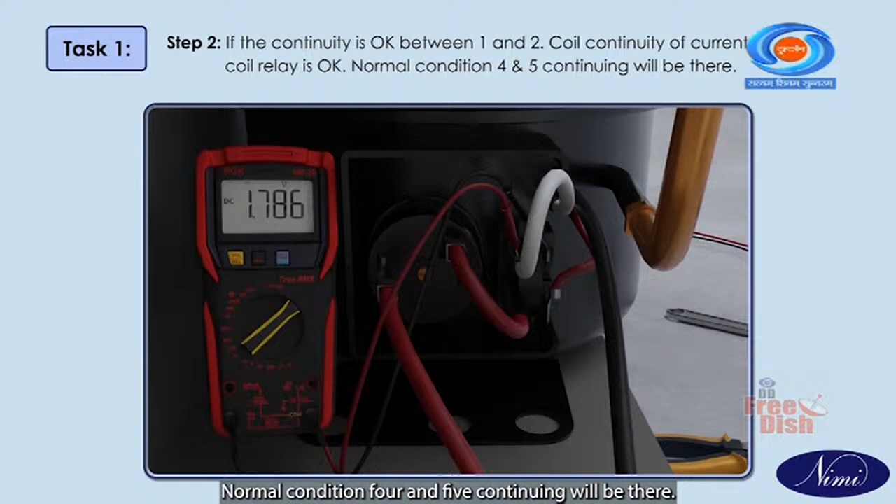Step 3. Check continuity between 5 and 6. Normal condition when not in use, 5 and 6 open. If there is no continuity between 5 and 6, relay is OK. Step 4. Keep the relay upside down. Check continuity between 5 and 6. If the continuity is there, relay is OK.

Step 5. Bring to its original position. Check continuity between 2 and 3. If there is no continuity, relay found OK.

Step 6. Check plunger movement and observe sound. Keep the relay upside down. Plunger moves up and you can hear the sound. Bring to normal position, plunger comes down. You can hear sound. If there is no sound, relay is defective, relay plunger operating is not OK.

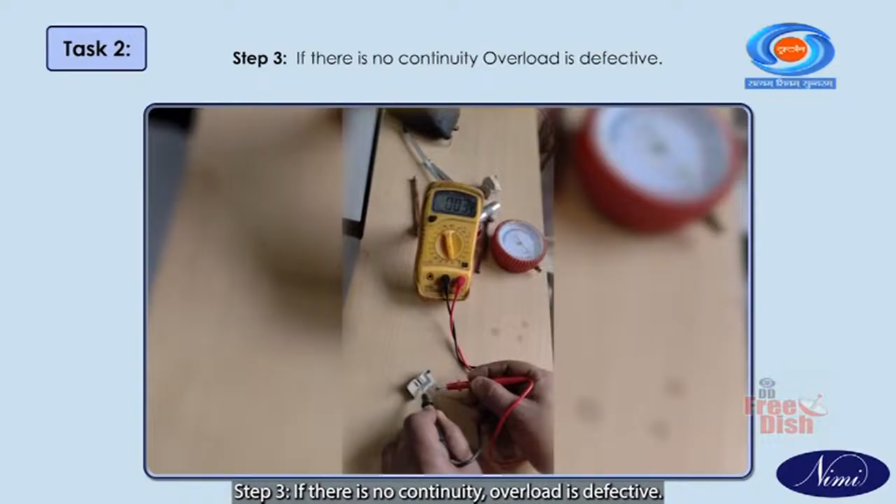Task 2. Check the overload protector. Step 1. Check continuity between 1 and 3. Step 2. If the continuity is OK between 4 and 5, continuity of bimetal contacts is OK. Step 3. If there is no continuity, overload is defective. Step 4. Check any rust formation in the disc. If rust formation is there, it is not advisable to use.

Task 3. Identification of compressor winding terminal pins with ohm meter or clamp meter on a fractional horsepower hermetic compressor. Before carrying out the exercise, remember: running winding resistance is always less than starting winding. Starting winding resistance is always higher than running winding. Resistance of run and starting winding equals the sum of starting winding resistance and running winding resistance.

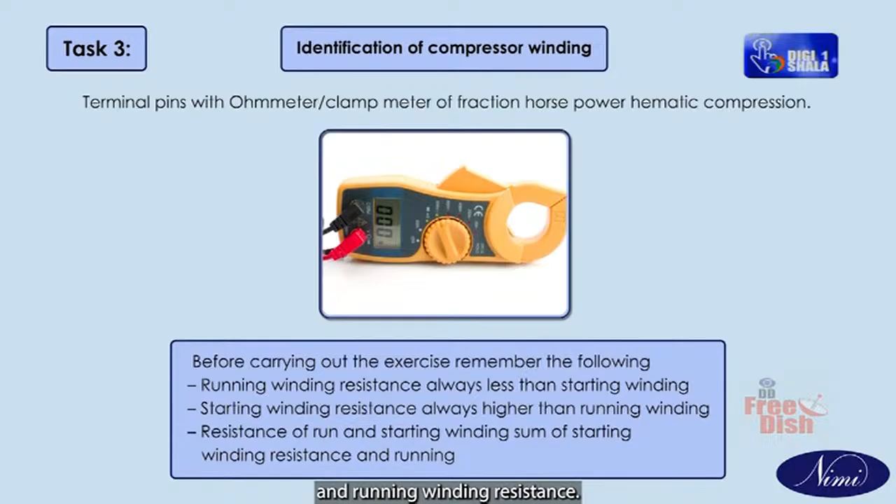Set your multimeter to the resistance ohms mode. Touch one multimeter probe to one of the motor's terminals and the other probe to one of the remaining terminals. The terminal that shows the lowest resistance to both other terminals is likely the common terminal. This is because the common terminal is connected to both windings, and measuring across it will show the combined resistance of both windings. Note down the readings.

Step 1. Set the ohm meter in resistance at low range. Step 2. Measure the resistance between A and C, 20 ohms. Step 3. Measure the resistance between A and B, 40 ohms. Step 4. Measure the resistance between C and B, 60 ohms, and record the values in the tabulation. Step 5. Identified A terminal pin becomes the common terminal. Step 6.

Identified B terminal pin becomes starting winding. Step 7: identified C terminal pin is run winding. Resistance values slightly vary from manufacturer to manufacturer, so the instructor must have the compressor manufacturer's specification.

Task 4: Check short circuit in compressor. Step 1: Set the multimeter to resistance mode at the appropriate range. Step 2: Place probe A to the compressor terminal. Step 3: Place probe B to the metal casing of the compressor. Step 4: Check continuity. If continuity is there, the compressor is grounded. Step 5: If there is no continuity, the compressor is not grounded.

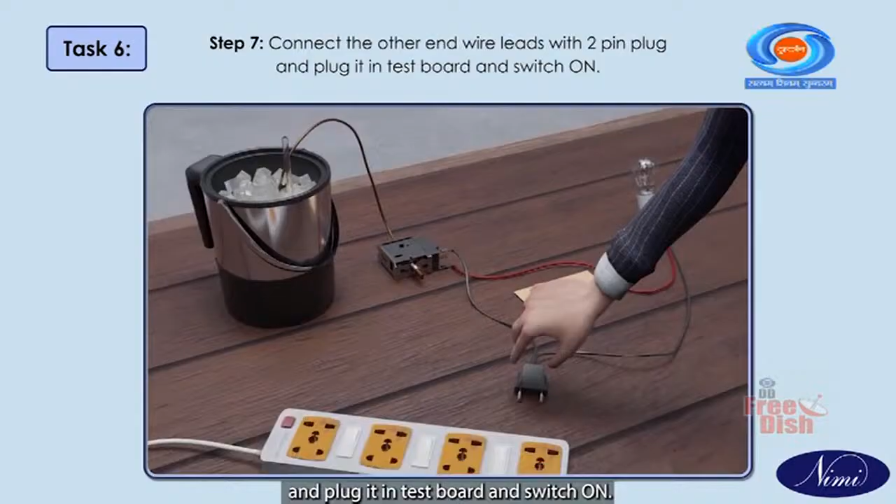Step 5: Connect 2 wire leads to the thermostat. Step 6: Connect a bulb in series with the thermostat. Step 7: Connect the other end wire leads with a 2-pin plug and plug it into the test board and switch on. Step 8: Check that the light glows when the knob of the thermostat is not in stop position. Step 9: If the light is not glowing when the knob of the thermostat is in stop position.

Step 10: Adjust the knob to the on position. Step 11: Watch the reading of the thermometer. Step 12: See that the 100 watt bulb glows all the time. Step 13: Wait till the thermostat goes to cut off, which will be indicated by the off position of the light. Quickly take the reading of the thermometer.

Step 14: Remove the thermal bulb from the ice cubes. Step 15: Hold the thermal bulb by hand and warm it when the thermostat goes to cut in position, which will be indicated by the glowing of the 100 watt bulb. Step 16: Note the temperatures for 3 different readings carefully and record them in the tabulation.

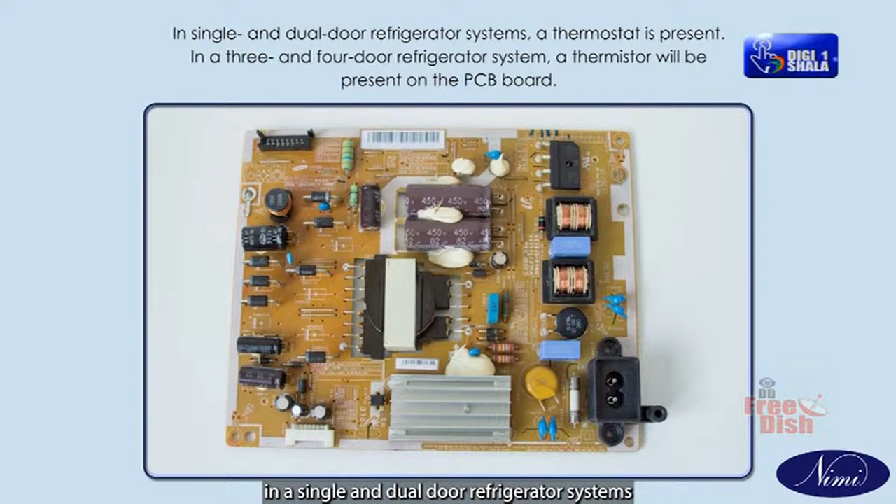In single and dual door refrigerator systems, a thermostat is present. In 3 and 4 door refrigerator systems, a thermistor will be present on the PCB board. Start by visually inspecting the PCBs for any signs of damage, such as burn marks, discoloration, or corrosion. Check for loose or damaged components, connectors, and solder joints.

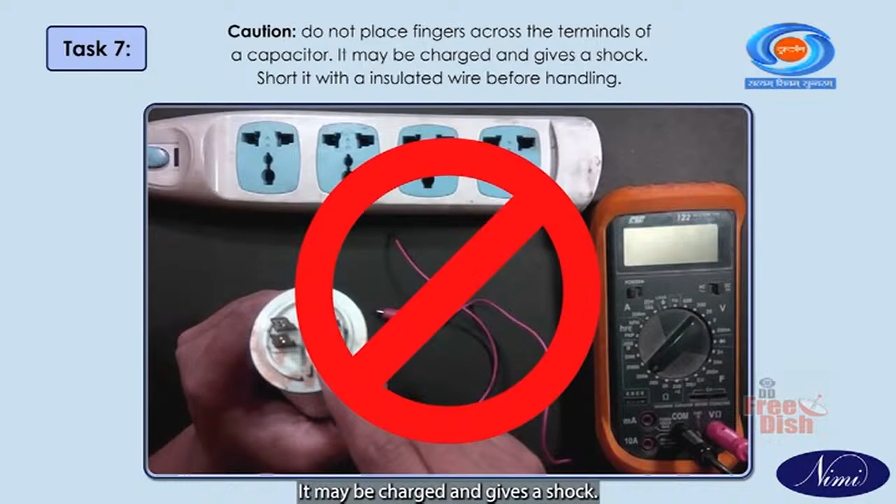Task 7: Check capacitor. Caution: do not place fingers across the terminals of a capacitor, as it may be charged and give a shock. Short it with an insulated wire before handling. Step 1: Remove the capacitor for test. Step 2: Connect the capacitor in the capacitor test circuit.

Step 3: Check the fuse D in the circuit as shown. Step 4: Switch on the circuit plug E. If the capacitor does not take a charge, it will not spark. This indicates an open circuit. The capacitor is connected to the terminals of the tester.

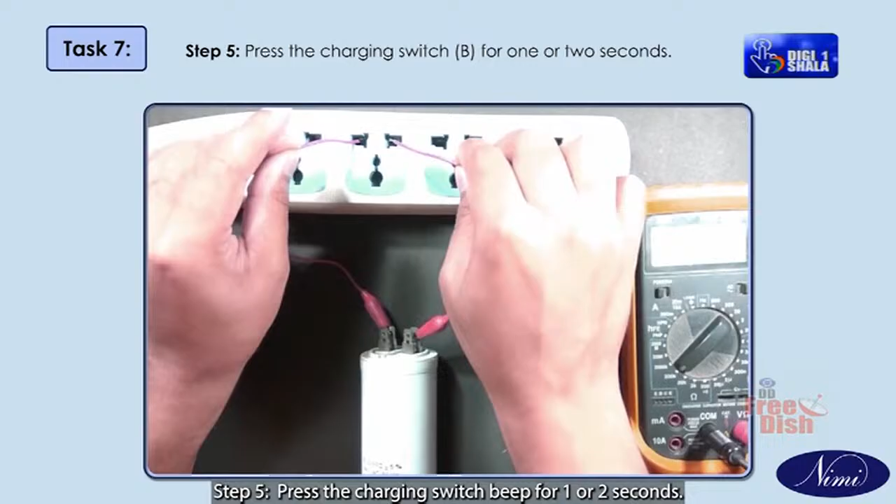Step 5: Press the charging switch B for 1 or 2 seconds. Step 6: Put off the circuit plug E. Step 7: With the switch open at B, touch the shorting switch C. If the capacitor is good, the switch will spark.

Step 8: If it does not spark the first time, try it 2 or 3 times before replacing the capacitor in the unit. Note: if the capacitor is good, it will spark. If the capacitor is shorted or grounded, fuse D will blow as shown. Caution: the capacitor should be put in a protective case while testing, because a shorted capacitor may explode when put in a circuit.

Recap: in this video session, so far we have discussed how to check out for faults and test the electrical and other related system components of a refrigerator.

Hi everyone, in today's video, let us learn how to test a compressor and identify the motor terminals.

Objectives: at the end of this video, you will be able to check compressor hermetic pumping efficiency, check the compressor winding, check for short circuit grounded in the compressor, identify compressor terminals using test lamps, and identify the compressor winding using an ohm meter or clamp meter.

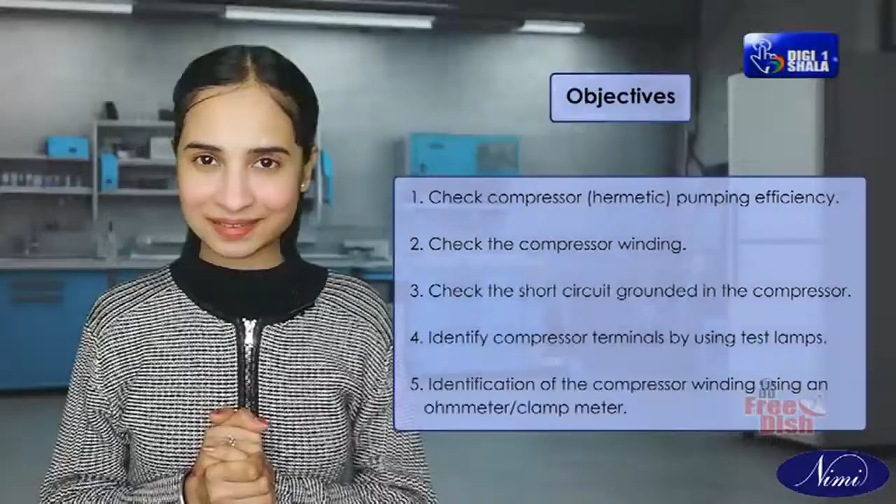Let us collect the tools and equipment required to do this practical: gauge manifold, 1 number; charging line, 1 number; ratchet wrench, 1 number.

Adjustment wrench, 1 number; multimeter, 1 number; insulated nose plier, 1 number; line tester, 1 number; refrigerant cylinder, 1 number; hermetic compressor, high capacity, 1 number.

Screwdriver, 200 mm, 1 number; soldering iron, 65 watts, 1 number; series test lamp, 1 number; sealed compressor, small capacity, 1 number.

Procedure, Task 1: Check compressor hermetic pumping efficiency. Step 1: Connect the refrigerant cylinder to the process tube of the hermetic compressor using a pressure regulator. Step 2: Connect the discharge side of the compressor to a condenser coil having appropriate capacity.

Connect the other end of the condenser coil to a pressure gauge having a range of 0 to 20.5 kg per centimeter square. Step 3: Check for leakages at all joints using soap solution.

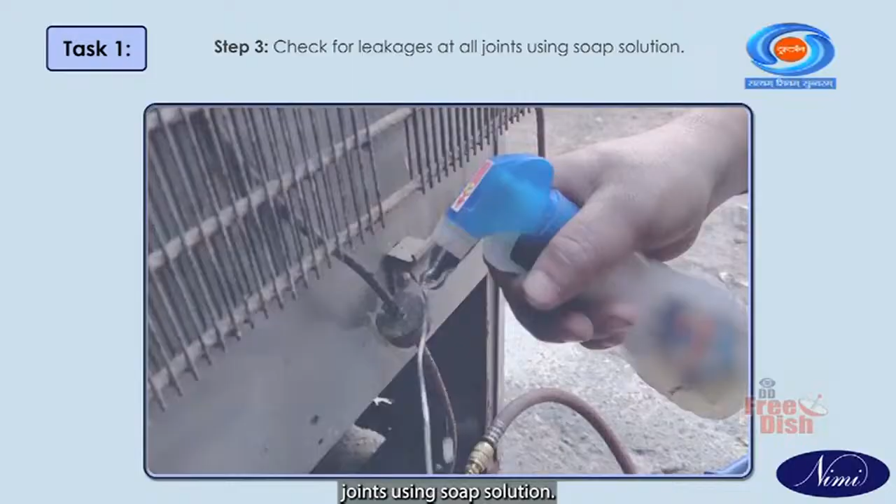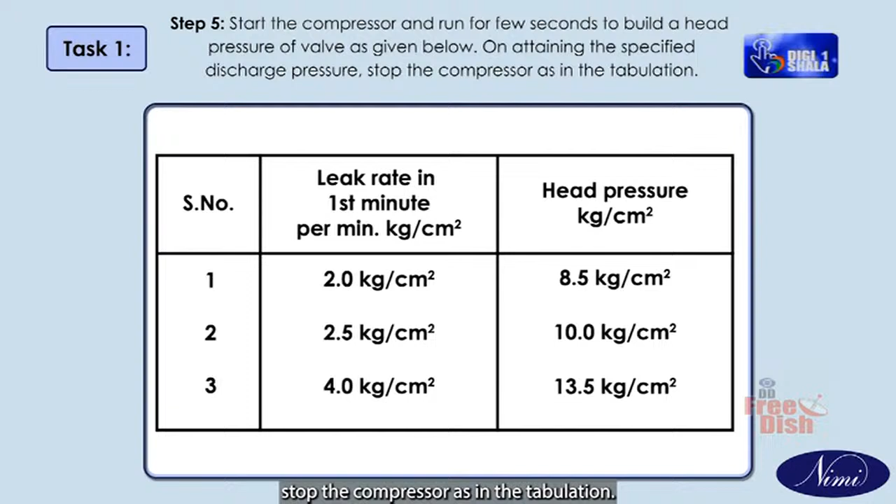Step 6: Check for drop in pressure for a period of 1 minute and verify whether it falls within the specified limit in the tabulation. Step 7: In case the drop exceeds the specified limit, the compressor has a pumping defect; otherwise, the compressor is perfectly okay.

Task 2: Check hermetic compressor winding by multimeter. Identify the terminal pins with an ohm meter of a fraction horsepower hermetic compressor. Before carrying out the exercise, remember the following.

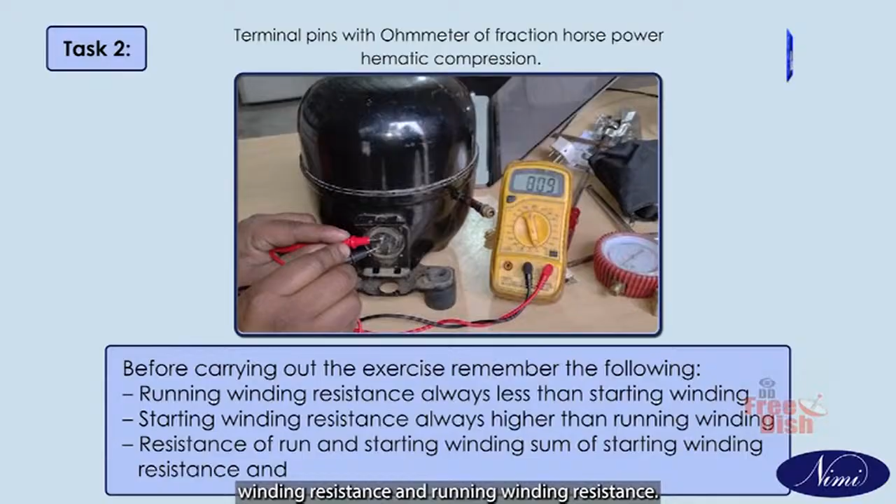Running winding resistance is always less than starting winding resistance. Starting winding resistance is always higher than running winding resistance. The resistance of the run and start winding equals the sum of the starting winding resistance and the running winding resistance.

Step 1: Set the ohm meter in resistance mode at low range. Step 2: Measure the resistance between A and C, 20 ohms. Step 3: Measure the resistance between A and B, 40 ohms. Step 4: Measure the resistance between C and B, 60 ohms.

Task 3: Check for short circuit grounded in the compressor. Step 1: Select the ohm meter scale R into 10,000. Step 2: Place the A probe on the compressor terminal.

Step 3: Place the B probe on the metal casing of the compressor. Step 4: Check continuity. If there is continuity, the compressor is grounded. Step 5: If there is no continuity, the compressor is not grounded.

Task 4: Identify compressor terminals by using test lamps. Step 1: Prepare a test lamp. Connect one end of the lamp to the phase terminal in the test board and the other terminal to any one of the terminals, X, in the compressor.

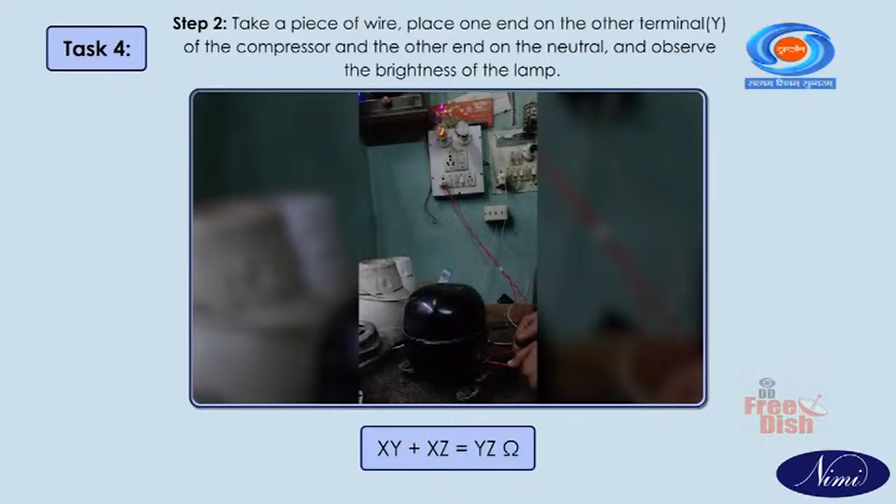XY plus XZ equals YZ ohms. Good winding resistance shows the above results. Test and measure the pair of terminals X-Y, X-Z, and Y-Z; they indicate different ohm values.

Recap: in this video, we have discussed checking the compressor's hermetic pumping efficiency, checking the compressor winding, checking for short circuit grounded in the compressor, identifying compressor terminals using test lamps, and identifying the compressor winding using an ohm meter.